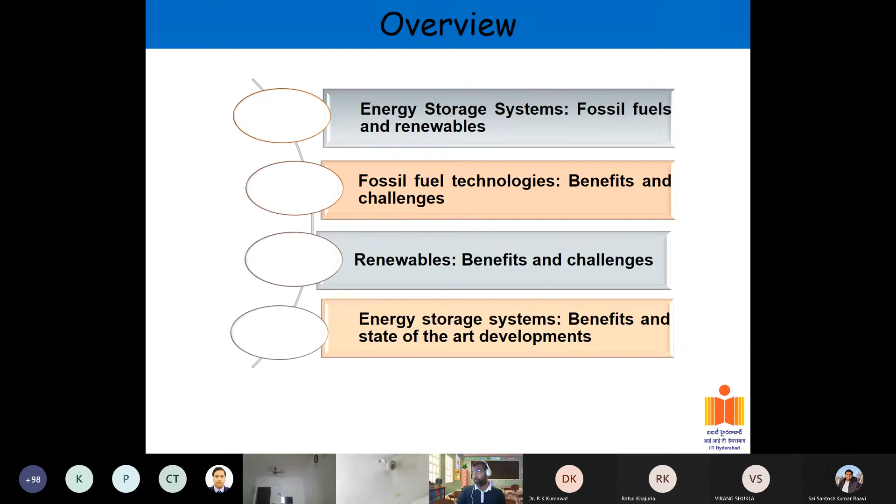And where does energy storage come in? Why does it come in? Why can't we just use solar cells and be okay with it? The idea here is to see how energy storage systems support several of these technologies, be it fossil fuel technologies or renewables. I'll get there with apt examples to show you why and how it is important.

Okay, moving on. Just a basic refresher on energy - what is energy? We keep using the term, right? Every time we talk about energy, it's just the ability to do work, and there are different units by which you measure energy: BTU, joules, whatever. So it's very basic in nature, and there are different forms of energy.

If you look at energy storage happening in nature, there are different forms it can store in: chemical energy, typically energy between the bonds of molecules; thermal energy associated with the heat of an object; potential and kinetic energy; electrical energy with the movement of electrons; radiant energy, which is energy from the sun; and nuclear energy, which you can essentially extract from atoms.

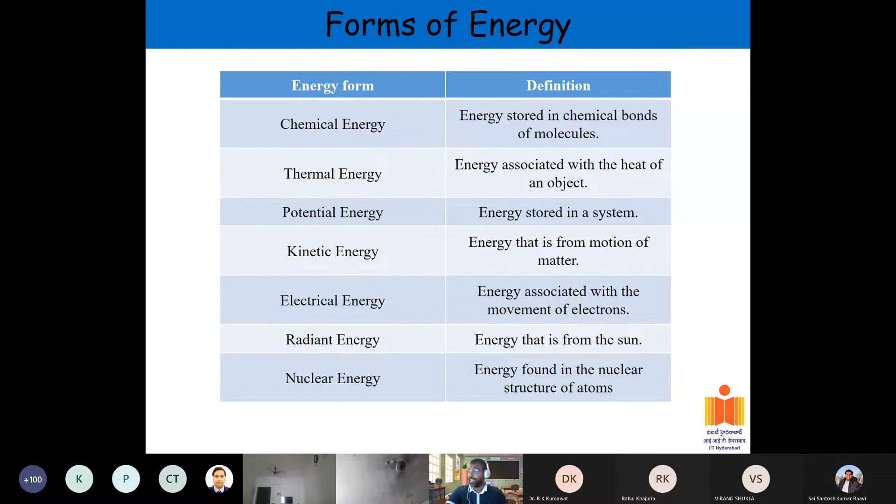Just to get you started and put things in perspective: if you look at one piece of bread with some butter on it, that typically contains about 315 kilojoules. That's the energy contained in that buttered bread.

So if you want to put it in context and think about what you can achieve with that kind of energy: you can jog for 6 minutes, bicycle for about 10 minutes, or walk briskly for 15 minutes. Sleep also requires energy since your body is still functioning, but at a much lower level, so that's 1.5 hours. If you're trying to use a car with that energy, it will only last 7 seconds.

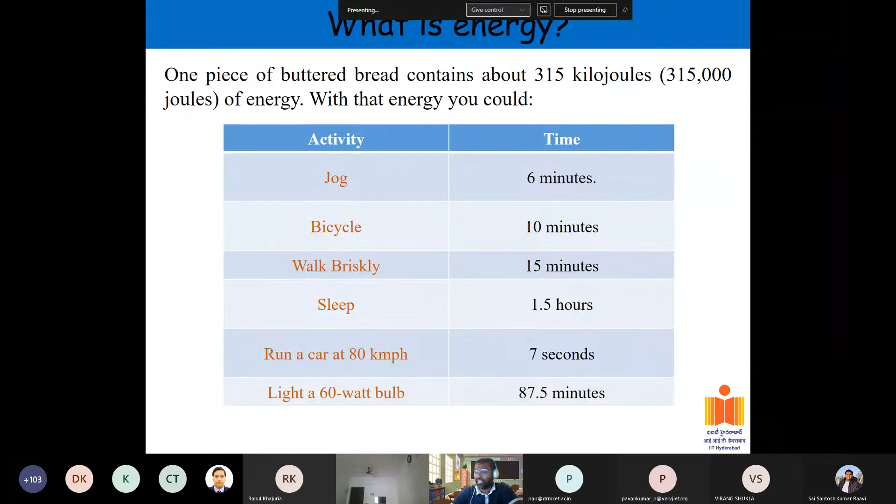Going back to what I was saying, with the same amount of energy you can only run a car at 80 kilometers per hour for about 7 seconds, and if you're using it to light a 60-watt bulb in your home, it will last about 1.5 hours, similar to what your sleep requires. This is just to put in perspective the energy required. Running a car, for example, requires a humongous amount of energy, as you can see from this example.

So we will go into energy storage systems, some of them fossil fuels. I like to refer to these generally as natural energy storage systems. If you look at different types of fossil fuels or energy storage systems available today, they include coal, natural gas, crude oil, and wood. You see a lot of times wood being burnt, right?

Then you have nuclear. The image being shown here is essentially a nuclear power plant. I'll also quickly talk about that when we get there, why it is important, or how India is playing a role in the same.

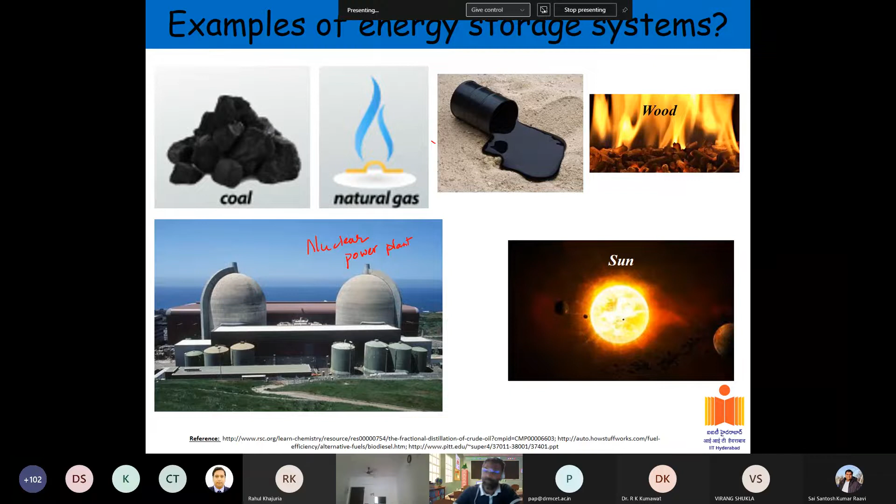And then sun, so as you all know. First, going into a typical coal plant: what happens in coal is that coal is extracted or dug up from the earth, and coal has a lot of impurities. It can be good coal, generally referred to as high efficiency coal, or low efficiency coal. One message here is that India generally has deposits of low efficiency coal, so a lot of the coal available in India is not very useful or efficient for power generation. That's the reason India imports a lot of coal from outside countries, for example Australia, and so on.

So what happens with that coal? You take the coal and essentially purify it, removing whatever impurities there are, and then you burn the coal. In this burning process, what you generate is heat, and the heat converts water into steam. Steam drives a generator, and essentially that's how you collect your energy.

The image here shows a typical setup of a coal plant. This is the location from where coal comes in, and then it is burnt here. Regular water goes in and becomes steam, and the steam leads to electricity generation. Once the steam is used for driving the turbine, it comes back and condenses into water. Whatever remains after the pulverization is essentially waste material.

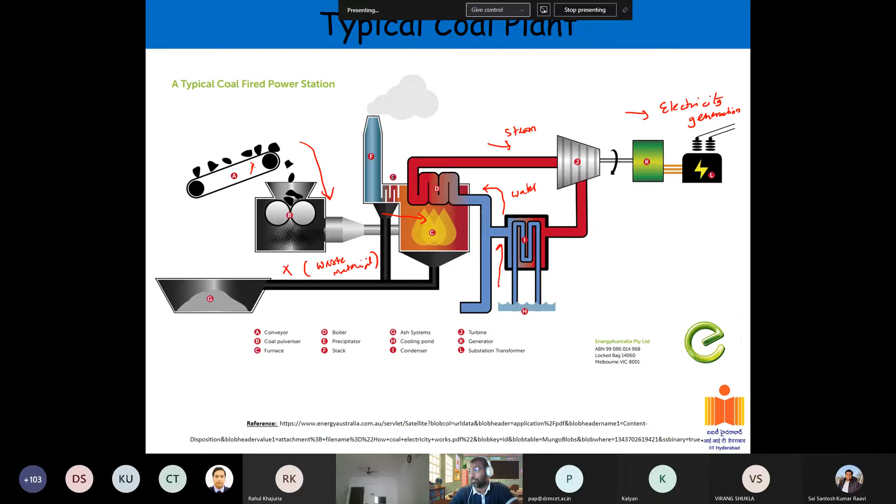So this is a typical coal process. Coal gasification and similar processes have been done for hundreds of years now, maybe a couple of centuries. People have been working on it. But we'll come back to that.

The second one is crude oil. Crude oil has a lot of uses, so I wanted to point that out in this picture. If you look at crude oil, this is a distillation column, a simple fractional distillation.

It gives a lot of different compounds. One of the first things it gives is LPG, which we use for our cooking needs. LPG is typically a mix of propane and butane, primarily.

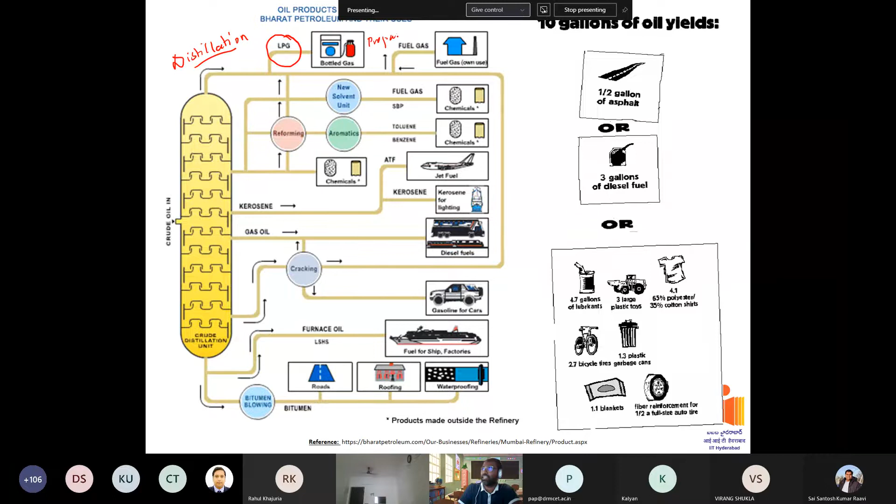Then the second part is where you get fuel gas and some other organic compounds like toluene, benzene, and so on. There's a reforming that happens in one stage. The next stage gives things like kerosene, diesel, and petrol, which you extract from there.

The next one is something called furnace oil or heavy oil. It doesn't have as much energy content as these other components, so it's used as fuel. Its energy density per weight is very low, so you don't want to use it in other applications, but in a ship it's not a big concern. Heavy oil is used in ships for various energy generation purposes.

The last portion is bitumen, which is used a lot in road making, roof making, etc. This is also very widely used. If you look at a typical crude oil extraction process, you end up seeing that it has a lot of uses.

This figure doesn't show it, but one of the main, most value-added things now for crude oil distillation is actually polymers. Polymers started off as a byproduct of crude oil distillation, and now it's one of the most value-added products, meaning it fetches the most money. Companies like Reliance and others make more money from polymers than anything else.

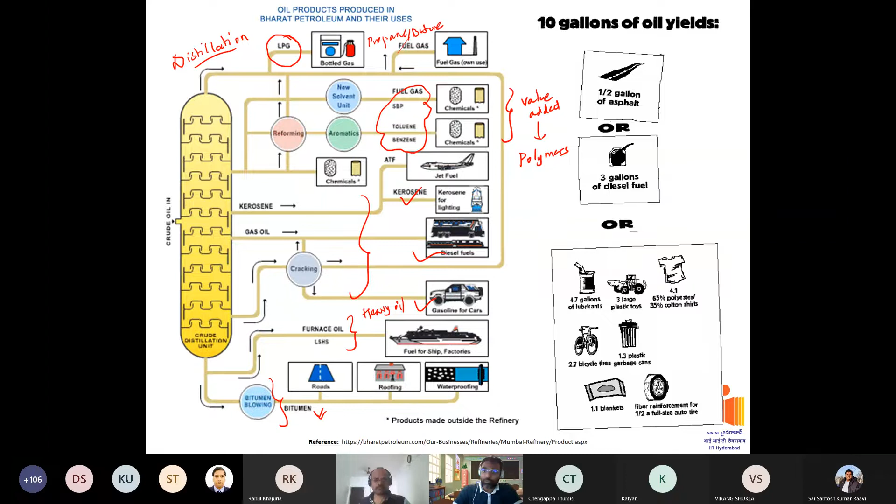All right, so that is about crude oil and some context on it. Then natural gas. This is something that has picked up in the last decade or two decades. So what is natural gas? Simply put, it is methane.

That is nothing but CH4, methane. Natural gas is so enticing because of the simple reaction by which you can produce energy from it. If you have CH4 plus oxygen, and you burn it, essentially what you end up getting is CO2 plus 2H2O.

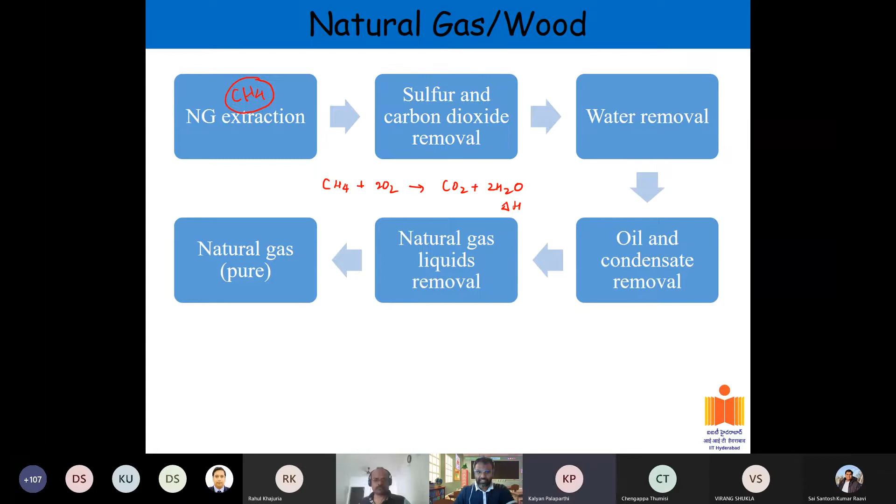Excuse me. Hello. I can... Somebody, there is a lot of disturbance, can you mute it please? Hello. Hello, can you guys hear me? Hello, can somebody please respond and say whether you are able to hear me or not? Sir, we are able to hear you, sir. You are audible. Okay, okay.

So going back, we are looking at this: a simple reaction between these two gives you a delta H, or the heat of reaction, of around minus 800 kilojoules per mole. That's a high amount of energy. What we are trying to do is extract that delta H or energy and utilize it for various purposes. That is why natural gas is also very enticing.

If you look at the natural gas extraction process, it typically has a lot of sulfur and carbon dioxide present that needs to be removed. As you drill natural gas from the earth's crust, it's not something you can directly use as is. That's one of the biggest problems. You need to refine it through several stages to get to a final pure product. So you have sulfur and carbon dioxide removal, water removal, and oil and some condensate or waste materials that need to be removed.

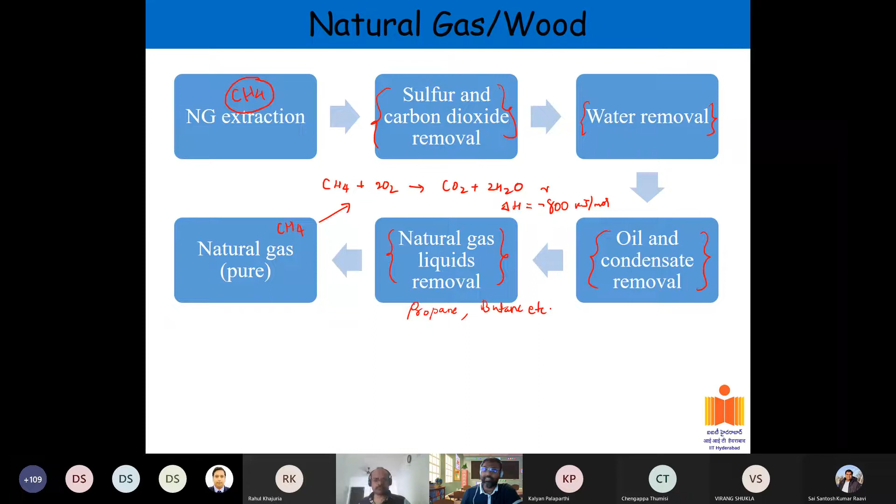So why natural gas? One of the main reasons people are looking at natural gas is because it produces less carbon dioxide than coal-based energy generation. If you compare coal-based versus natural gas-based energy generation, the CO2 production is almost half, or slightly less than half, when using natural gas. So the amount of CO2 you're generating goes down. That's one reason why all countries are now looking at natural gas based systems.

So the simple question could be: what's the big deal? Why didn't somebody pay more attention to this, say 50 years ago, and start using natural gas instead of coal at a much earlier period? The reason is one of the challenges with natural gas: methane has 80 times more heat retention than CO2. So compared to CO2, methane is 80 times more detrimental towards greenhouse gas emissions. That's one of the reasons why methane was not touched upon in the last 50-100 years.

But now there are more technologies and more efficient ways of methane extraction, where the leakages are very low, and hence the methane leakage to the environment is not as much as it was 50 or 30 years ago. People are able to contain methane in a much better manner now. What we're trying to do is use it without much leaking to the environment. There's been a lot of technology improvement in the last 20 years, and that's why more companies are moving towards natural gas based energy generation.

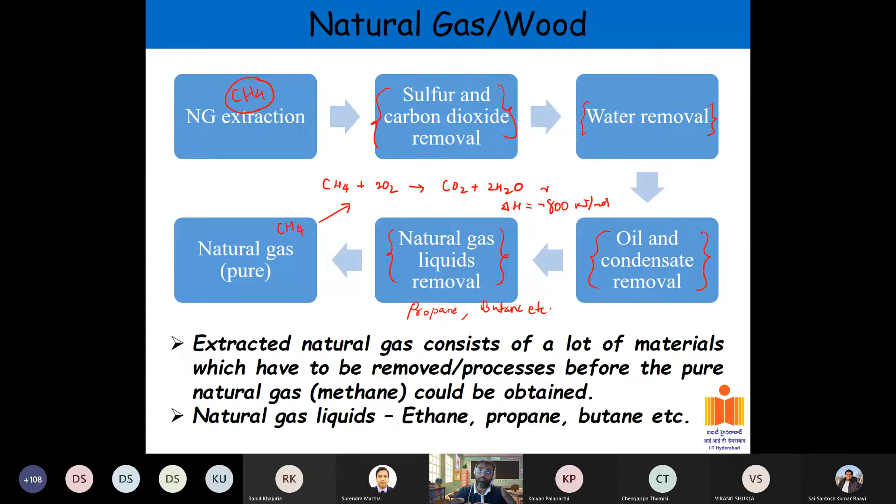Moving ahead to nuclear energy—why am I bringing this up? Because India now produces about 6,000 megawatts of power from nuclear power plants. We have about 6 power plants spread over about 3 states—I think two or three in Tamil Nadu, one in Maharashtra, one in Rajasthan or so. This has picked up in the last 5-6 years in terms of production of energy utilizing nuclear power. There's a roadmap by the government to double or triple it in the next 5-10 years.

One of the main reasons nuclear is attractive is that it's highly efficient. I'll show you in a few slides what I mean by that. Its energy density is very high—the amount of energy per kg of uranium is significantly higher than any of the other sources. I'll show you that in the next slide.

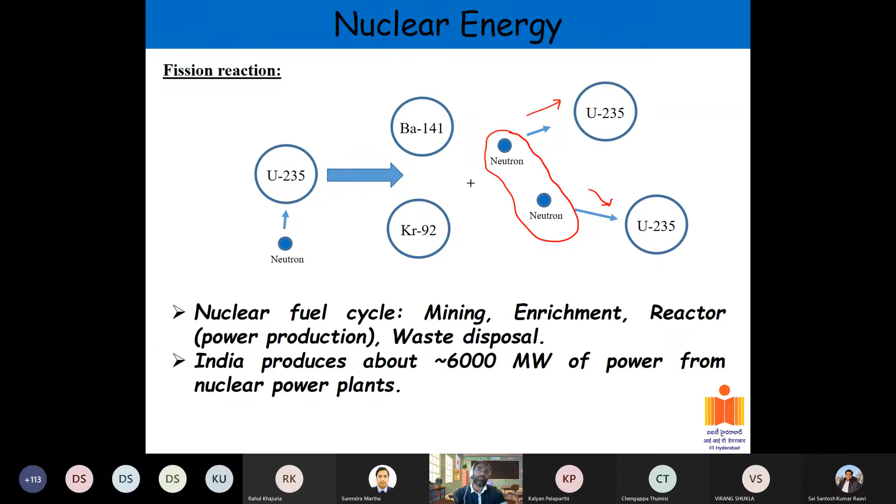But I think when there was not as much renewables, France, Japan, Russia, and some of these countries constructed a lot of nuclear plants to generate energy. Russia had one or two major accidents, but France and Japan typically haven't had any man-made accidents on the nuclear front. So yes, there is environmental concern, but it is a good source of energy if it can be harnessed well enough. If you dispose of the waste in the right manner, it can still function well. That's the whole idea.

And when you talk about energy storage systems, one of the things you refer to is primary sources of energy and secondary sources of energy. Primary sources are typically things like crude oil, coal, natural gas, nuclear, waste-based, solar, hydro, and so on. The secondary energy systems are when you convert them into usable products, something like petrol, electricity, heat, or biofuel.

What I want to convey here is that the primary sources of energy can never be utilized by themselves. The primary sources always have to be processed in some manner or the other to get to the secondary source of energy, which are the ones you primarily want to use.

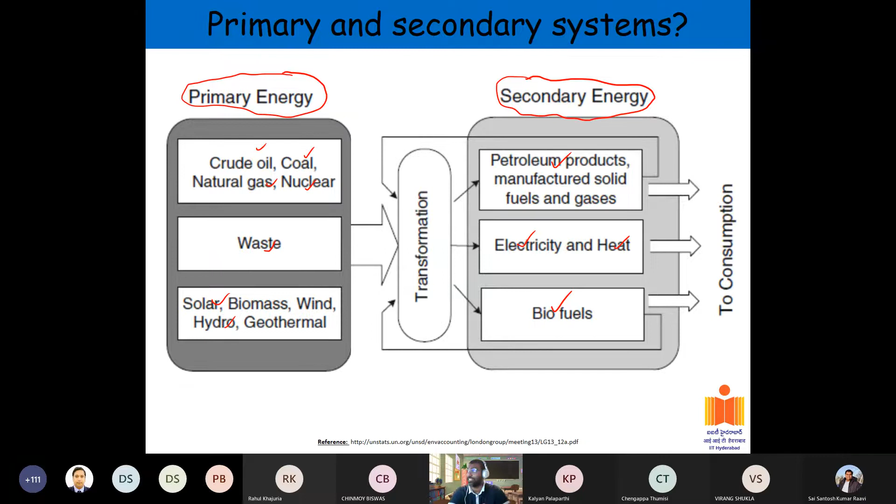So, okay, the primary and secondary sources. I think the secondary sources of energy are the ones that are directly usable by you. So there is some transformation that has to happen when you talk about primary sources of energy to go to the secondary sources like petroleum, heat, and electricity, etc.

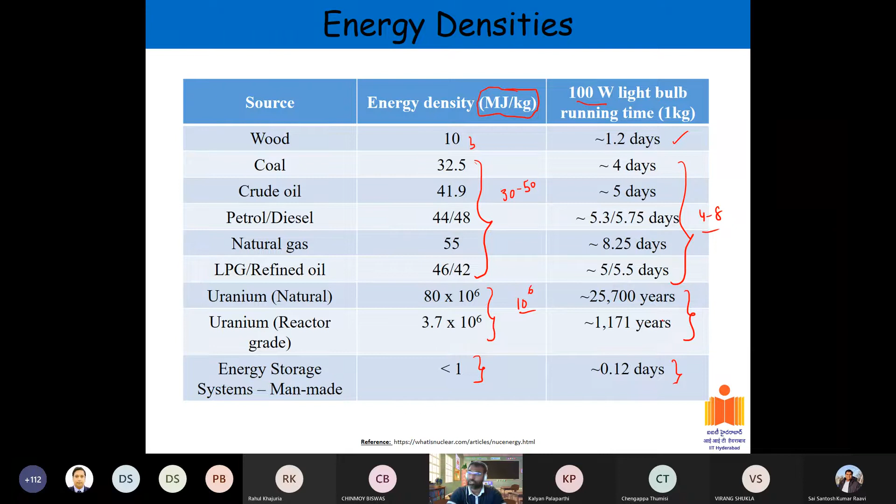So that is where we are as a world in terms of the usage of different things, and renewables still only contributes significantly lower, I think it amounts to less than 15% of contribution or usage for the production of energy, whereas coal, oil and natural gas are the primary sources.

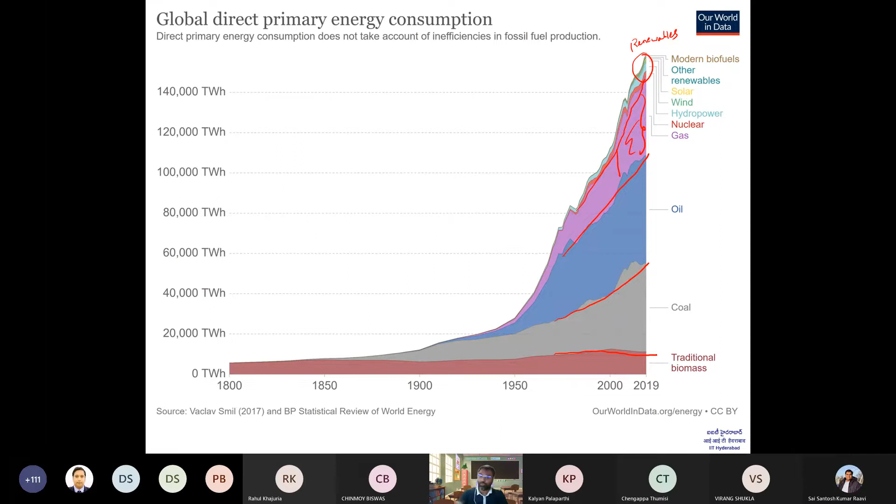So like I said, one of the main reasons for fossil fuels is it has high energy density, significantly higher energy density. And we know the technology very well, so it's very hard to move away from them. Over the last couple hundred years, we have understood very well how to extract it, how to purify it, so it's a very established technology. It's not very easy to move away from an established technology. That's one of the challenges we will have when moving away from naturally occurring fossil fuels to some of the other man-made or relevant new energy technologies.

So that's one of the obstacles that will be there. In a way, that has to be overcome if the government provides a lot of incentives. For example, if you're setting up a solar cell at your home, it might be much more expensive than getting power from the regular grid. But if there is a subsidy on that, you'll be more inclined to set it up. So maybe a 50% subsidy, and then some of the cost can be reduced. In that context, established technologies are generally cheaper because they're more established, so newer technologies are a little more expensive and we need to understand them more. Some help from the government has to come to promote these, and that is what we have seen happening in the last 10 years or so.

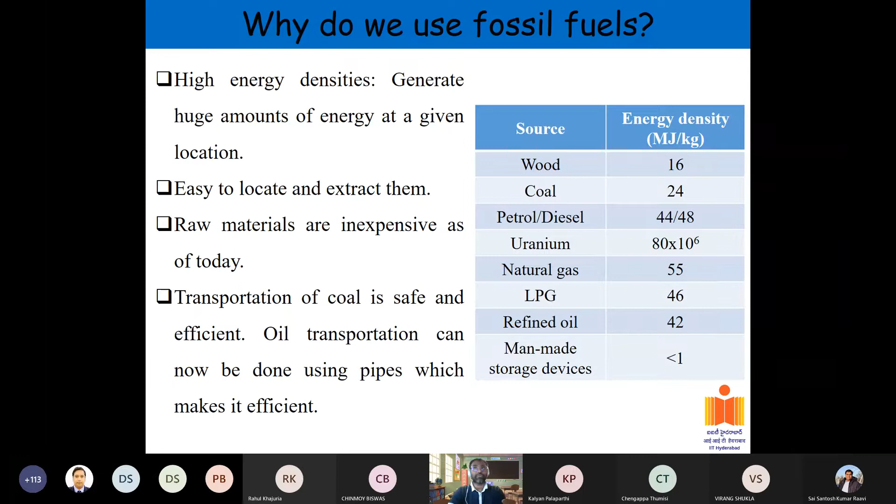One of the other interesting things about coal, oil, or any of these is they are very safe for any kind of transportation. So you move coal from Australia to India, nothing happens. You move oil from Saudi Arabia to India, it comes in ships, and it's rather very safe. So the primary sources of energy themselves are very safe for transportation and movement, whereas some of the man-made energy storage systems like batteries, we have seen cases of safety issues. That is another challenge we need to address to make something more widely used.

Okay, so until now I've been articulating why fossil fuels are so interesting, or why they hold the major share in the world, and it all looks like my explanation shows they are very good. No, they are not. There are big challenges with them, so that is what I'm going to discuss in this part. One, people believe they will exist somewhere between 100 to 300 years.

I think whatever reserves we have found till now in the Earth's crust will typically last for 100 to 300 years, whether it's crude oil, natural gas, or coal. So the question is, what happens after 300 years? Maybe we'll find new reserves, but we don't know. So what shall we do if coal, natural gas, or crude oil no longer exist in 300 years? That's one of the reasons why we want to go to alternative energy technologies.

The second reason is global warming, which you see happening over the last 200-300 years. I think it has been happening for a couple hundred years, but it's more predominant in the last 50 years because of the growth of technology. There's been a significant increase in technology, right from the 1990s or 2000s to 2020, a 20-30 year span where the phone market, TV market, laptops and computers have all evolved. This significant growth in technology leads to high energy consumption, and when that energy consumption comes from fossil fuels, there's a predominant effect on the Earth's temperature.

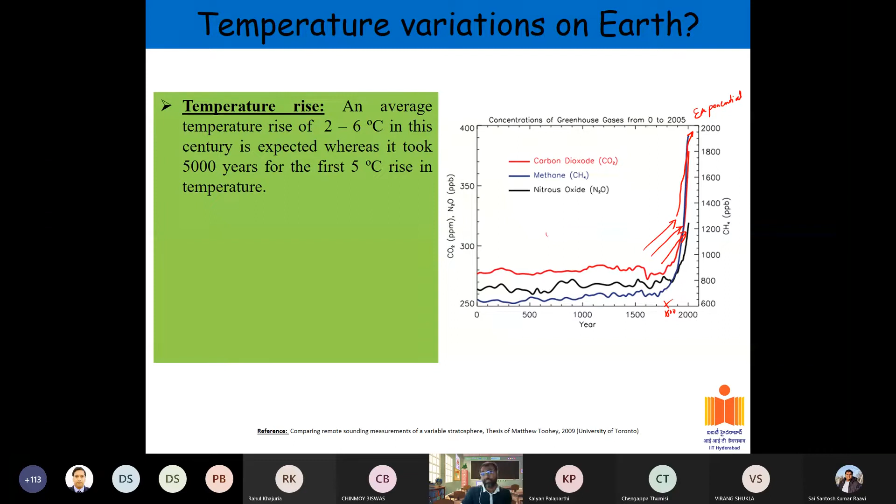You might ask, what does 1 degree centigrade change actually do? If you look at your body, for example, as a simple analogy, 98 going to 100 means you have a fever - a stark difference in how your body functions. It's the same anywhere else. A one degree temperature rise will typically lead to a lot of polar caps melting and things of that nature, having a profound effect on life on Earth.

The main causes are CO2 and CH4, particularly CH4. As I mentioned when we talked about natural gas, CH4 stores 80 times more heat than CO2, so that's a bigger problem in global warming. But if you can efficiently use natural gas without any leaks, you can curtail or overcome that problem essentially.

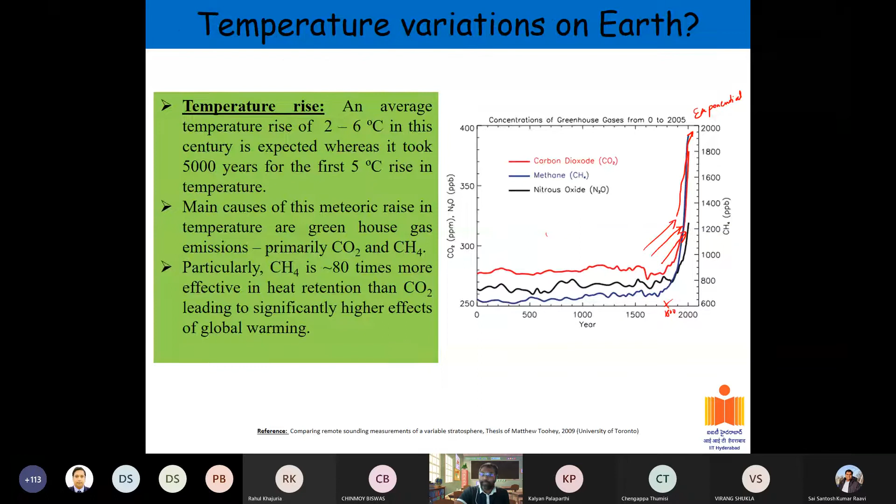I showed you this coal-fired power plant before - everything looked very nice and good. So why do we have to move away from coal? The overall efficiency is the issue - there are a lot of mechanical parts involved in electricity generation using coal. Because of that, the efficiencies of the best new technologies today are only slightly over 50%, around 50-55%, but they are more expensive. The general efficiencies of these coal plants are only 40%.

Most of them have to undergo some processing, and when they undergo the processing, the efficiencies go down. So essentially what you are extracting will be comparatively much less than what you can extract. So that's one of the challenges - the efficiency of these is low.

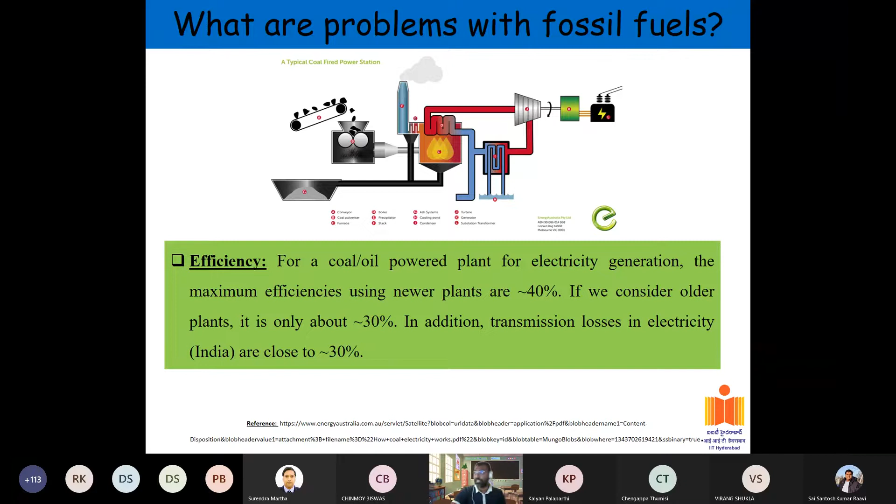What happens is your energy consumption drastically varies when you look at a single day. From 12 o'clock in the morning to 12 in the night, from 12 to 6 you might not have much energy consumption - everybody is sleeping, or most people are sleeping. But then you look at people going to offices, going to schools, going to shops, whatever. So there is a sharp rise in the energy requirement from, let's say, 6 to 8. In a 2 hour gap, you have a sharp rise in the energy requirement, and then it more or less stays there for the next 4 to 6 hours of the day.

So that energy, and then there is a small peak in the evening. Typically when people come back home, they switch on the TVs, and do whatever work is at home. So there is a slight increase in the energy requirement, and then it goes back down by nighttime.

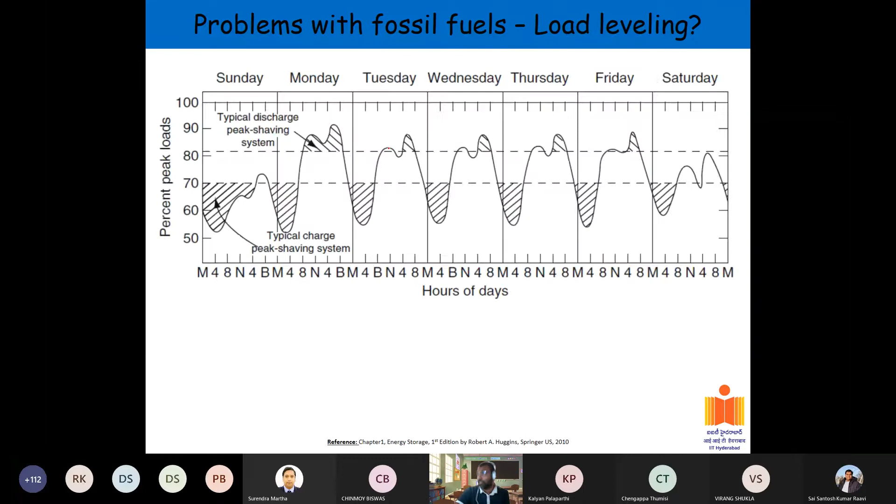But what can energy storage systems do? A lot of the power plants, and not only the power plants but the subdivisions where power distribution happens, have these energy storage systems. So what does that do? When you generate it at a much lower level, say 20,000 megawatts, and you're not using it, you can charge your energy storage system. You are charging it during the night time until early morning, using that extra energy that is there.

And during the daytime, you don't have to rely on your power generation plant, but rather you can use your energy storage system to discharge. What it is doing is discharging, essentially giving you the required energy. So now you can see how the problem of high generation has been brought down when you have an energy storage system along with your power generation source.

So there are different technologies now being used at the substation level to supplement the extra needs of energy this way. That is where energy storage systems play a significant role, even for fossil fuels. Without storage, energy generation and distribution is very inefficient. The take-home message is that energy storage has to go hand in hand with any energy generation source for it to be highly efficient, or else you can still do it, but in a much more inefficient way.

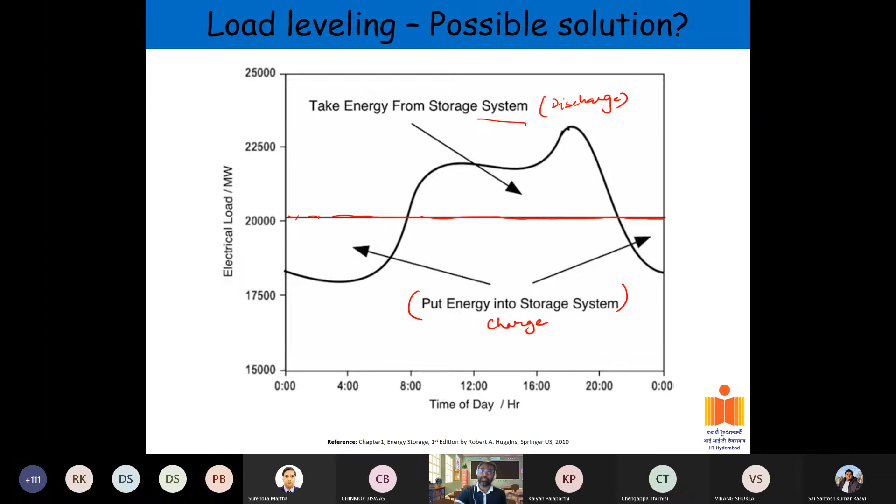So essentially, if you connect your energy generation source with a battery, your voltage comes through the battery, which absorbs all these modulations or undulations, and what you get out is much lower fluctuation in voltage. That's why, if you've looked at your own house inverters, typically all the current runs through your inverter battery. The reason being it can accommodate all the voltage fluctuations, and what you get into the house is something that's less fluctuating.

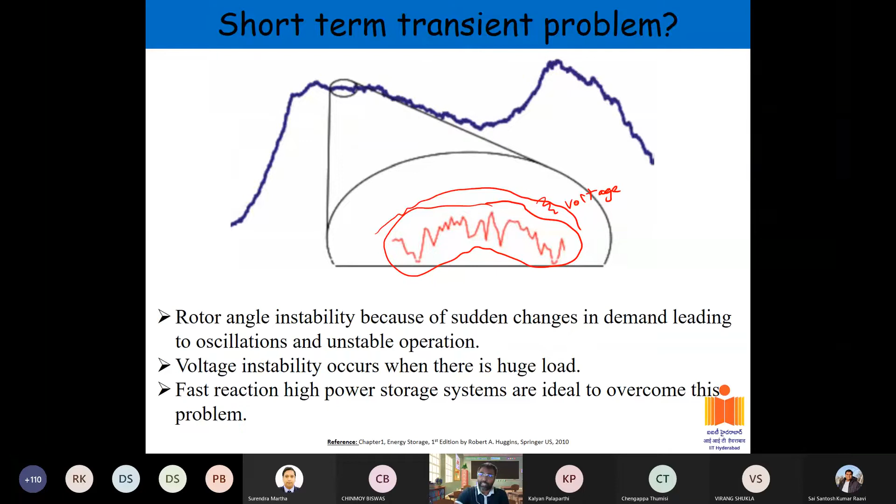That will keep your electrical appliances running for a much longer period of time, or make their life longer. Otherwise, if you see a lot of voltage fluctuations, the appliances might get burnt and all these problems come in. So those are a couple of things that are very interesting where energy storage systems quite help. They're used now, and I think they'll be used as long as the energy sources exist.

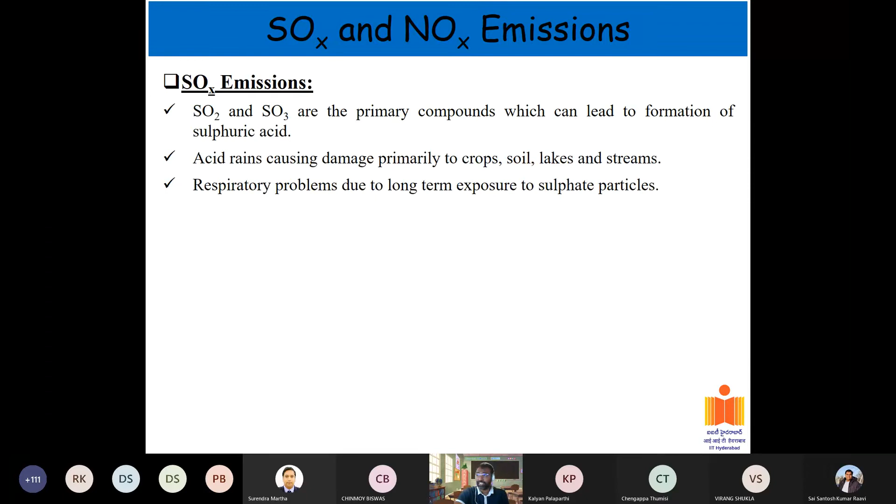And the other problem, I think Professor Pillai was referring to, is environmental problems, or the air not being clean enough in India. Where does that come from? It is primarily because of SOx and NOx emissions, the sulfur oxides and nitrous oxide emissions. Where do they come from? Sulfur oxide comes from fuel that contains sulfur. For example, petrol is relatively much more pure, so it doesn't contain any sulfur, whereas diesel-based operations have some amount of sulfur in diesel. So what does it lead to? It leads to sulfur emissions, sulfur oxide emissions.

And nitrous oxide emissions. So when you are utilizing petrol or diesel, typically you have to heat it to 900 degrees centigrade. If you look at your car, the temperature at which the combustion happens is about 900 degrees centigrade, and air is used as the gas for combustion. So in air you also see nitrogen, and at that temperature it's very hard to prevent formation of nitrous oxides, or NOx kind of substances.

There's something called a catalytic converter which prevents this from happening, or at least reduces the amount of nitrous oxides formed. But not every car has a platinum converter - those catalytic converters are expensive, and you only see them in higher end cars. So the problem of nitrous oxide emissions and sulfur oxide emissions is still there in India.

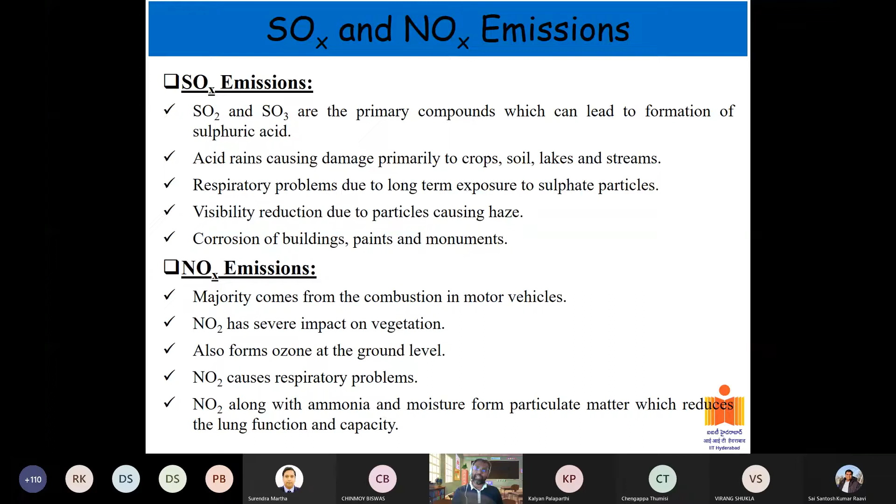So what does it do? These emissions essentially start forming small particles in the air. They react with various things in the air and start to form small particles, which you call particulate matter. And why is it so concerning, the particulate matter?

Just to give you an idea, your hair size typically is about 50 to 70 microns in diameter. Fine sand on the beach is about 90 microns in diameter, and so on. Whereas the particles I am talking about, the particulate matter particles, are less than 2.5 microns.

So what is the problem? Your simple question might be, why are we concerned about it? It can still exist, but what is the concern? The problem is this particulate matter can go inside your lungs, but it cannot be pushed out. The reason is that your lung does not have enough pressure to push it out. So when you inhale it, these particles go into your lung, sit there, and stay forever. When you exhale air, the lung does not have that kind of pushing power, or pressure - it cannot push these small particles out, because they're so light they settle in your lungs.

So what does that do? That reduces your breathing capacity with time. If you're continuously exposed to it day in, day out, over a period of time you lose your lung capacity, and that is a realistic problem that needs to be addressed. That's one of the main reasons why there are so many new policies in the last 10 years trying to reduce these particulate matter emissions.

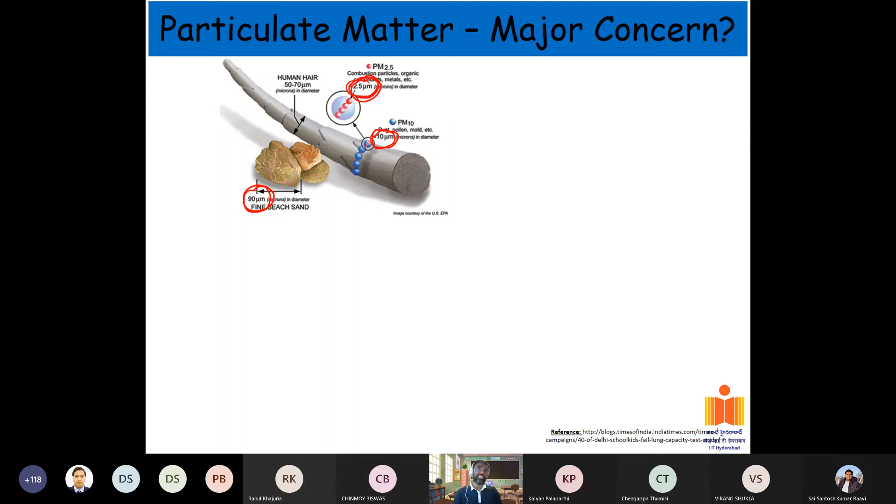The reason being, when you start burning any plant-based waste, you generate particulate matter again. So that's the problem - if you are burning it, it slowly generates particulate matter, and that particulate matter has big concerns, like I said.

So this is a study done 4 or 5 years ago, I think from 2016 or so - I haven't seen any other study after that like this. What they have done is tested children's lung capacity, children below 15 years of age, in the age group 10 to 15 years. What they have seen is that several children, up to 40%, lose their lung capacity in big cities like Delhi, Mumbai, Bangalore, and Kolkata, primarily because of particulate matter. That is something very significant, very not good for society.

This is a major challenge why we want to move away from fuels like petrol and diesel, both in an industrial setting and a vehicular setting. If you want to stop particulate matter, we need to act. That's why the new vehicle disposal policy gives you some money to dispose of your old vehicle. Why? Because a 20 or 30-year-old vehicle will emit a lot more particulate matter than something only 2-3 years old. So the government is now trying to force these old vehicles off the road to prevent particulate matter pollution. I think it is imperative for us to follow these steps to get it down.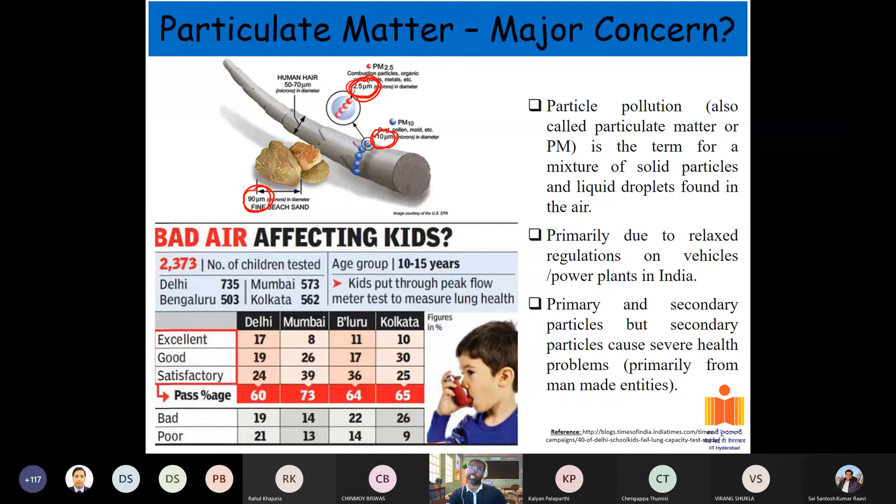Apart from this, these points are very general and will apply to a lot of countries, or the entire world. This slide will present what is very particular or peculiar to India.

Our rural areas are quite segregated in comparison to many places. The connectivity between rural and urban areas is still a challenge. How do we have power lines to such remote areas? So the idea is, instead of fossil fuel, why don't we set up a solar energy generation plant in a small village that is off grid? You can set up a plant there that takes care of all the needs of that village, even if it's only 100 families. In that context, any renewable energy generation and storage will be very efficient, one reason being connectivity.

If you look at urbanization, take Hyderabad for example, where I'm from. In the last 10 years there's been a drastic change in the number of people coming here and wanting to stay. So there's rapid urbanization, growth of apartments, growth of commercial buildings. Where do you get the energy from? It's not simple to raise the output of coal-based generation systems — you have to build a plant to improve that output, and that takes years.

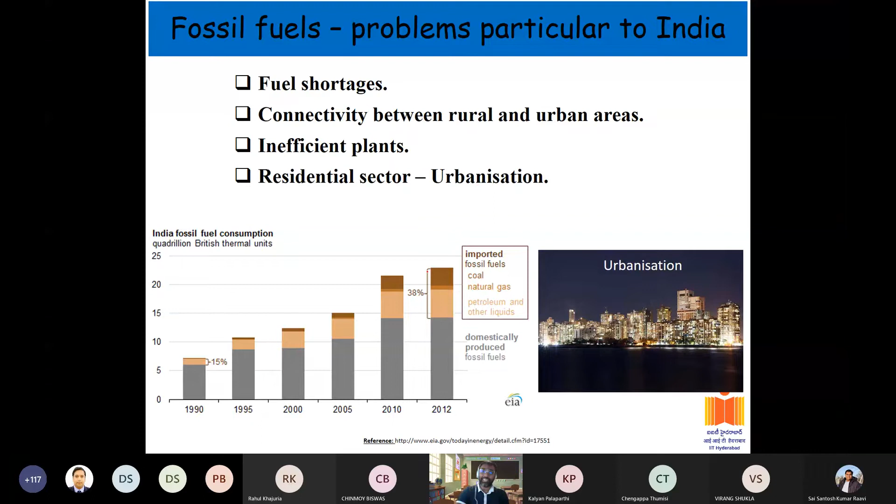So several of the coal deposits cannot be utilized in power generation, and we have to buy it from elsewhere. Primarily now Australia is one of the sources, or supplies us a lot of coal. So what happens is you are also dependent on another country for your energy generation needs. That's not a very suitable scenario. What if tomorrow they stop giving you coal? I mean, it won't happen, but I'm just talking about a hypothetical case where these things might happen, so you need to be prepared. That's one of the reasons renewable energy sources are important, because that will reduce our dependability on any other country or source. Essentially, we as a country can be self-sustainable when we go to renewable energy sources.

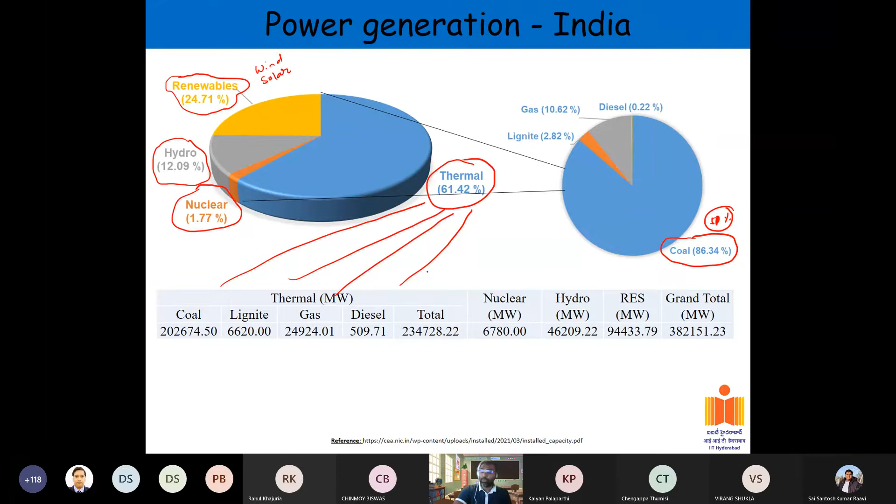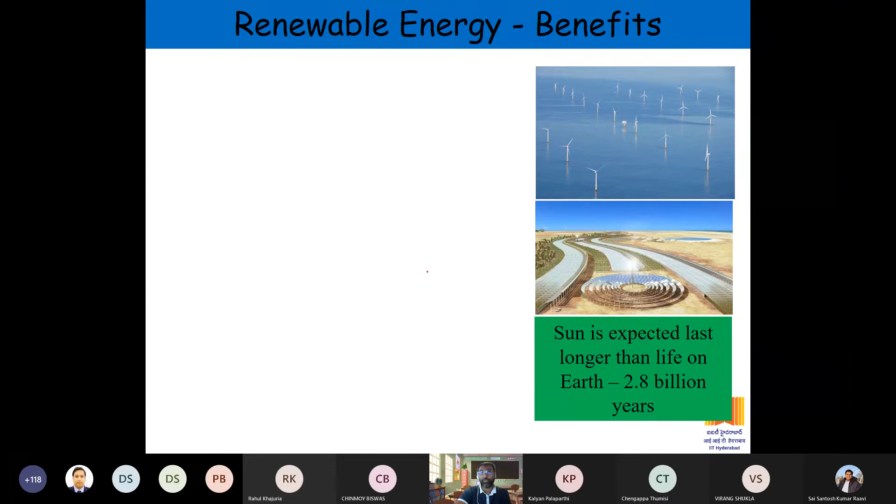Okay, so I think enough said about fossil fuels. I hope I've given you enough reasons why we should be looking at renewables and energy storage systems. This is a prelude on why fossil fuels are good, have been good so far, and still are probably good in terms of efficiency and energy density. But what are the challenges that have started cropping up in the last 20 years, and what are the more significant challenges that might come in the next 20-30 years? I hope that whole overview gave you a good understanding of those concepts. So now we'll move to renewable energy.

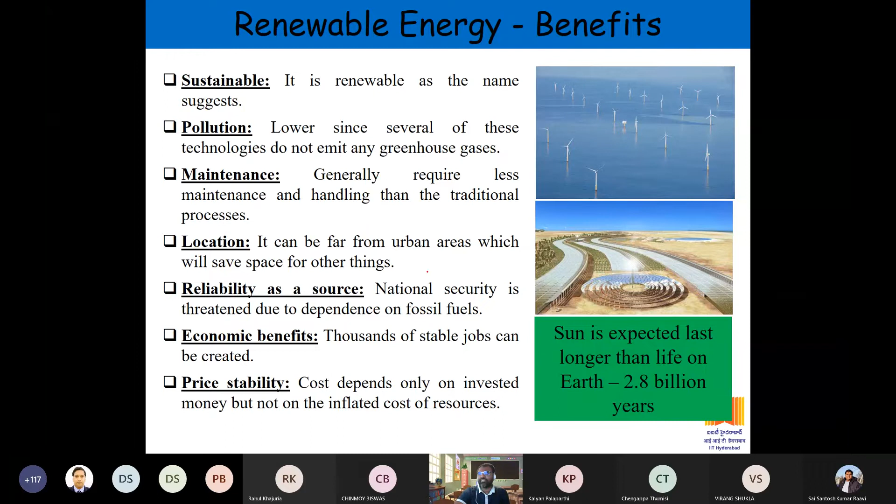So one of the main things whenever we talk about green, whenever we talk about producing our own things, sustainability is very important in everything that we do, in my opinion. It has to be sustainable - if you're doing something, it has to be there for the next 100 years or 200 years or 300 years. You cannot do something just for a day and say we've accomplished something. No, something has to be sustainable for it to be efficient day in, day out. Other benefits are well known: low pollution, low maintenance, and good economic benefits, which we have discussed enough.

Then what is the challenge? Why haven't we moved to renewable energy sources like 30 years ago? Why haven't people moved to it? Even today, I think we find it quite challenging. In terms of renewable energy systems and being able to implement them, you still think it's challenging. Why? One of the points repeatedly mentioned by Professor Pillai is reliability of supply - wind and sunshine are highly intermittent, so the weather dictates the supply. That is one challenge we encounter, especially in India. India is much better in terms of sun availability, but a lot of the northern hemisphere countries are not so. I'll show you in the next slides what I mean by that.

And the efficiencies are low. I talked about this, because we are still in the research stages, still understanding these systems. Our effort into these systems has only started in the last 2 decades or 20 years. We have achieved a lot in the last 20-25 years in this renewable energy domain.

But I think there's a long way to go to understand them further. And this high capital cost is very expensive, especially initially, so it has to be subsidized by the government, or some form of help has to be there for people. This is all more to do with economics. When something is available for 1 rupee, why would you buy something for 5 rupees, right? So that's a good question.

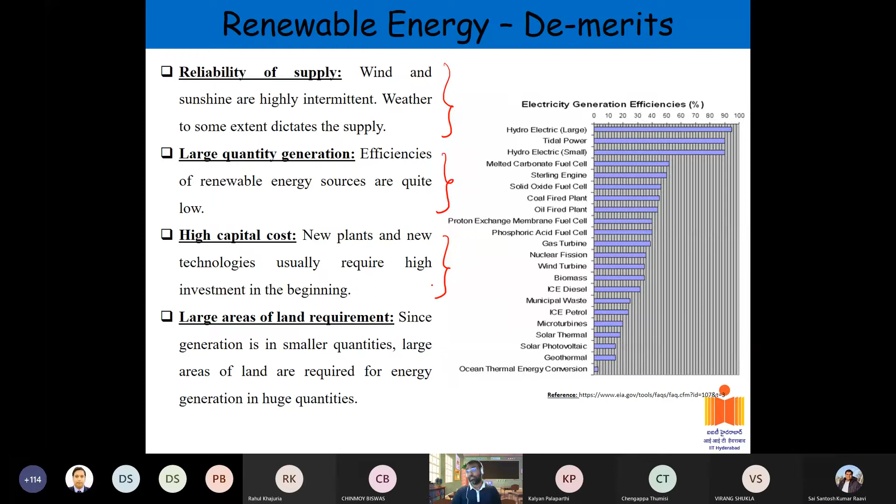For example, solar cells, when it started in Germany in the early 2000s, their kilowatt hour cost was something close to 10 euros. And by 2010, it dropped to less than 1 euro per kilowatt hour of generation. As you increase the scale, this is what you call the economics of scale - the cost goes down naturally. But that increase in scale has to happen with some kind of support in the beginning. That's where it is very important for countries to support it.

So solar energy, I won't do much more. I think we have a whole lot here. So the only thing I wanted to show here.

For example, if you look at 3 different places - London is the blue one, Cairo is the red one, and Kampala in Africa is the green one. If you look at the solar radiation in a year, from 1st January to 31st December, you can see that the variation is not much when you're talking about Kampala, so it's fine, you're not much worried. But as you go to Cairo to London, you see that there's a huge variation in how much sun, the incident sunlight, happens in those places. So that's where the challenge comes in.

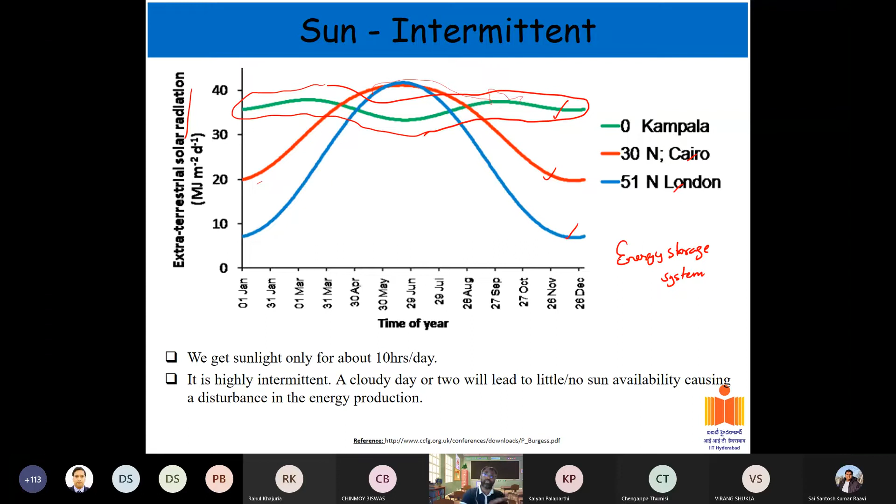So this is where it is not as straightforward to use solar energy at any location. What is the best way to go about this? Again, use an energy storage system. In the night time, or in the daytime when you have a lot of sun, you charge your energy storage system. Nighttime you can use it, or when you have sun you charge it. When you don't have the sun, you use it.

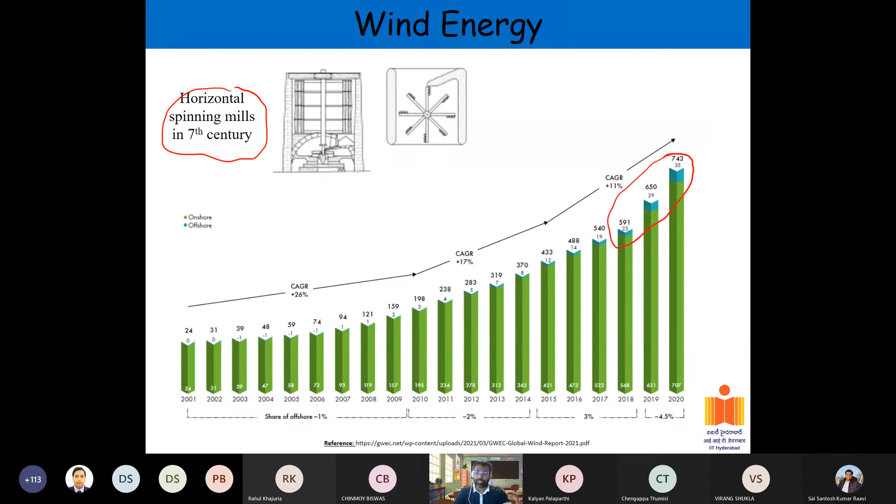And this has been existing for a long time. We have had these kinds of mills from the 7th century, so people knew this concept. Only now are we implementing the technology at a much larger scale. But again, it's the same problem with wind just like you saw with sun.

So what do you need? Again, you need an energy storage system. This is where energy storage systems are very important for any energy generation source. You can have a very highly efficient solar cell, highly efficient windmill, but without an energy storage source, at night times you cannot use solar energy, and when there is no wind, you cannot use wind energy. So a storage system has to be there - there's no separation of these two. Whenever you talk about energy generation sources, you need to think of it as there being a storage system with it. Without a storage system, the efficiencies are very, very low.

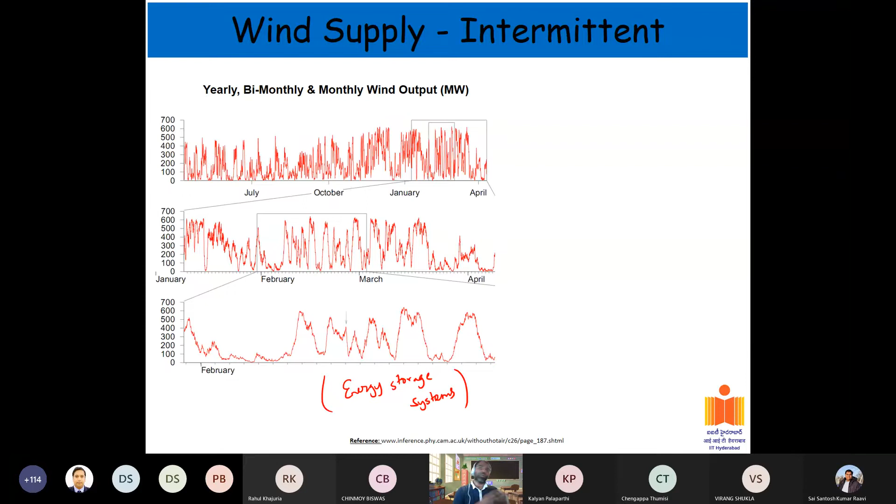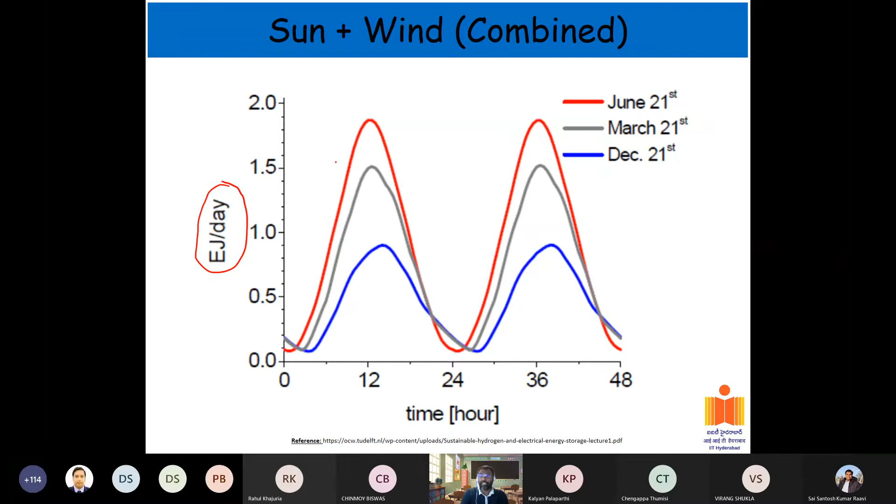The answer is I have an energy storage system. That's as simple as that. Okay, so that is about wind and solar.

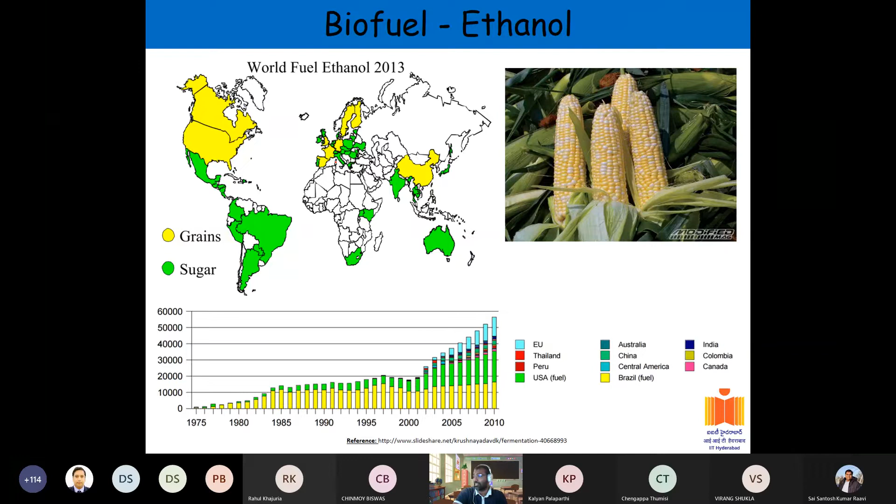Biofuel is another interesting thing. I think this program is not going to cover a lot about biofuels, but I just wanted to touch upon the topic in case somebody is interested in that area. So biofuel, primarily, one of the main reasons why it's very interesting is ethanol based.

I don't know if anybody has looked at the news in the last week or 10 days - the government is now trying to put about 20% ethanol in your petrol as an additive. It was about 10% until very recently. Now we are trying to move our engines - there is testing happening to see if the regular petrol engine can sustain 20% ethanol, and if not, what has to be done to achieve that blend. So it's a blend of 80% petrol and 20% ethanol, compared to around 90-10 now. The government is pushing for 80-20. So why ethanol?

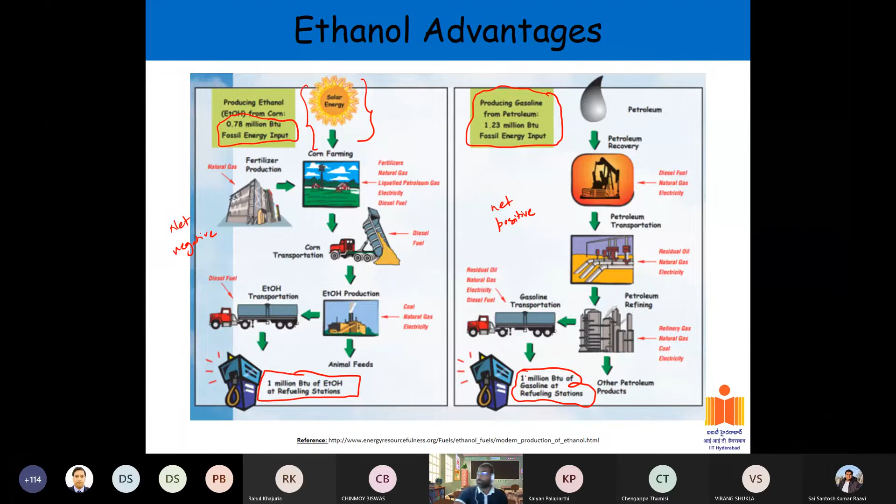The second good thing with ethanol is the carbon cycle. We've talked about carbon dioxide generation and carbon cycles in a bigger context. If you look at fossil fuels, it's a very long-term unbalanced cycle - you're burning fuel now, generating CO2 now, but that same CO2 has to be captured and put inside the earth, which will take 1 million years to regenerate to fuel. So the carbon dioxide produced today will only be regenerated after roughly 1 million years - that's a long-term unbalanced cycle.

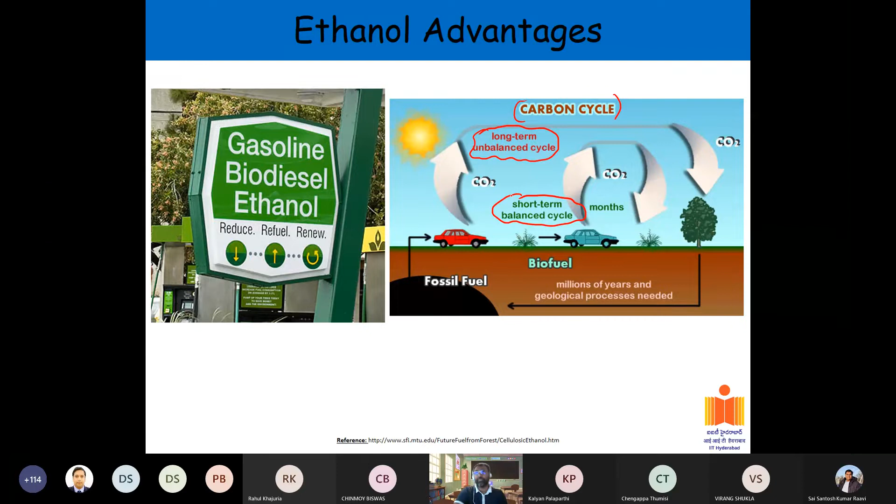So essentially what you call a much balanced cycle and short-term cycle. That carbon dioxide you're producing in your car using ethanol will be utilized by the plants that are producing ethanol. So that's one of the main advantages of ethanol. If we can make it a reality, it is truly very interesting, and it is one of the technologies that will increase the net positivity of energy as well as reduce the carbon dioxide.

But then this is a big question, a very debatable one: food or fuel. It's very hard to say. If there's not enough food for people to eat in countries like Africa, and you say you want to produce fuel, what is important? This is a big question that has been there for a long time. When you talk about ethanol, we need to find a way around it. In the sense, we need to be able to feed everybody and then go this route. But if not, then this is always a question that will be there.

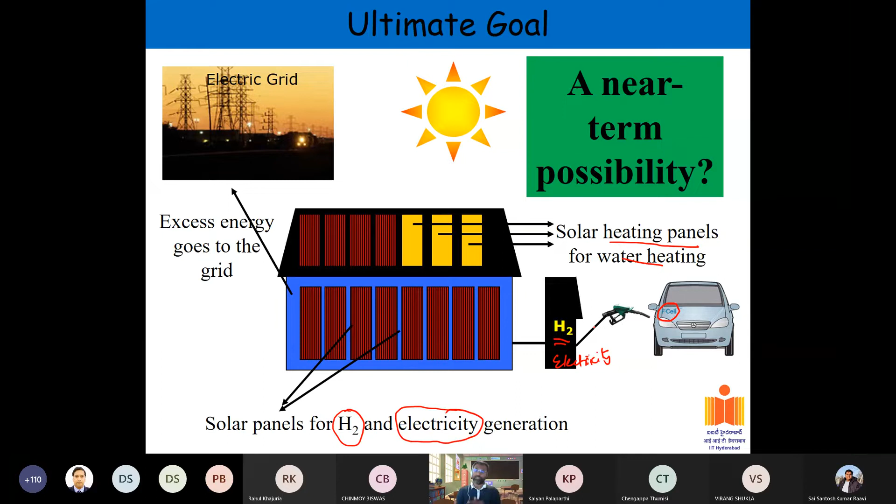So imagine you are giving back to the grid. You have excess energy production at home, so you are giving some of it back to the grid. You can use the solar heating panels for water heating and other purposes also. And then you can use hydrogen or electricity depending on what kind of car you have. I put hydrogen here for a fuel cell car, but if you have electricity directly that works too. So what does this show? The picture is trying to show self-sustainability. Essentially you don't depend on anything for your power needs, but rather when there is excess energy, you are able to donate it to the grid and take care of all your energy needs. This is what we are aiming for as a world, towards self-sustainability of individual people or individual houses.

Okay, so what is energy storage? Energy storage is a good balance between supply and demand, that's as simple as that. In the simplest terms, I look at it as the balance between supply and demand. When there is high supply, low demand, you store it in an energy storage system. And when there is high demand, low supply, you extract energy from the energy storage system. So in a very simplistic sense, it's just a balance between supply and demand.

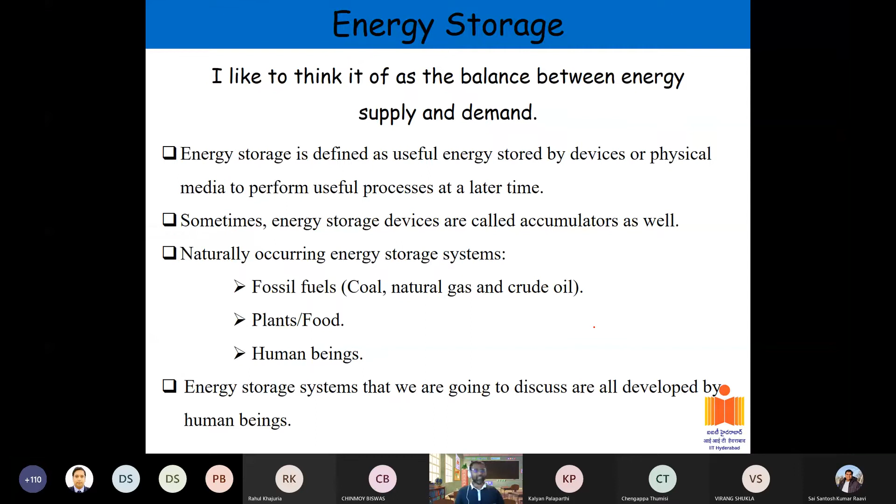So I think we discussed about several of these. I think this slide is okay. So there are different types of energy storage systems that are available.

Mechanical energy storage systems include pumped storage, flywheel technology, compressed air technology. If you go to electrical, there is capacitors, thermal, molten salts, chillers, chemical, hydrogen usage, methane, natural gas we talked about, and electrochemical - this conventional batteries, various types of batteries, let's say.

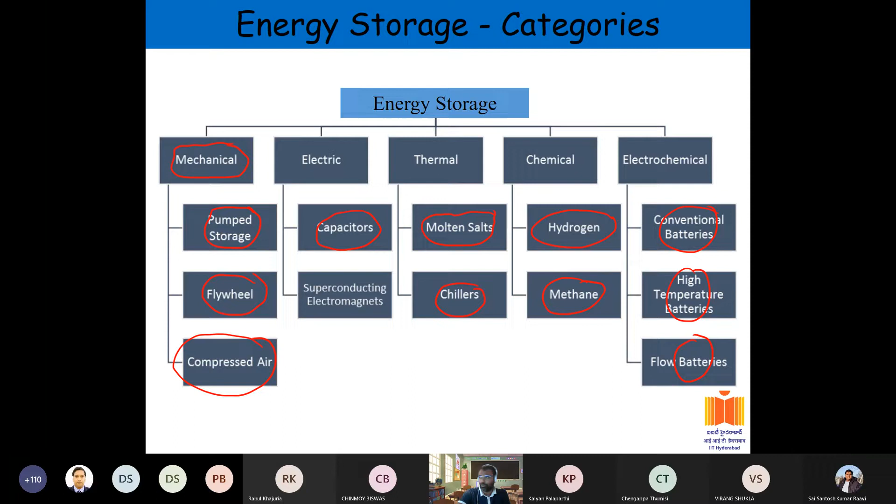So I'm going to go into a little bit of detail into some of these topics. I think just give you a very basic idea about what they mean, so that if you are interested, you can get started in those areas.

So the first one is compressed air energy storage. So what happens in this compressed air is that you take air - at the bottom you have a cavern, typically a big hole in the earth that is surrounded by different rocks. So what you do, you compress the air and put it inside.

When you have excess energy, for example here they are showing that you have a PV farm, you have sunlight, you have excess energy. What you are doing, you are taking the energy from them, compressing your air and storing it here. And then there is a demand when the sunlight goes down.

When there is a demand, what you can do, you can take the air up and use that air to kind of generate electricity. So you can use that compressed air to heat water, and the water generates steam. Steam can be utilized to generate electricity. So this is what you call compressed air energy storage.

So this is a low cost energy because you are not utilizing as much - mechanical storage happens in the earth. As long as you can find a big area where you can store a lot of this compressed air, there's no challenge with it. So it is almost inexpensive, and then you are extracting it when it is needed.

Air is the medium here, and it's environmentally friendly, so you don't have to worry about it. You use air, compress it, put it inside, take it out, decompress it, extract energy, and then again it is let out. So you're not polluting air or doing anything there. So in one way, it is one of the most environmentally friendly techniques that you can think of.

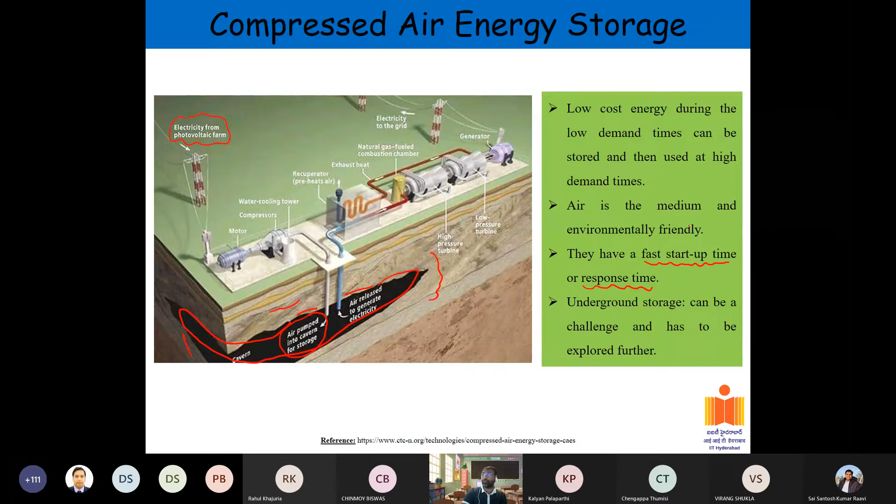And I told you about fast response times. That is very important when we are talking about energy storage systems, because some responses have to be very fast, instantaneous, some can take time. So for example, compressed air energy storage system is a fast response system. As soon as you release air and produce energy, you can give it out.

So that's one of the challenges - underground storage is a big challenge. So you have to find the right space, essentially the right location to store all this.

So I think usually what I think now, it has not been explored as much as in the last 5 years. I think in the last 5 years people have explored compressed air also quite a bit, and now I think countries like US have several places where they do this compressed air energy storage.

It's a very interesting system. It's a very straightforward system, only that you have to have the right location. So the location - typically what they do, wherever they dig the coal from or extract anything from the earth, they are using those locations to kind of put compressed air in it.

But one of the things that needs to be understood is the geological pattern. So you need to understand the geology of that location to be able to say whether we can utilize it or not. That's something very important to understand. You cannot go to any location and put air in. And if something were to happen, then it's a huge problem. So it has to have a very methodical approach to be able to implement it on a large scale.

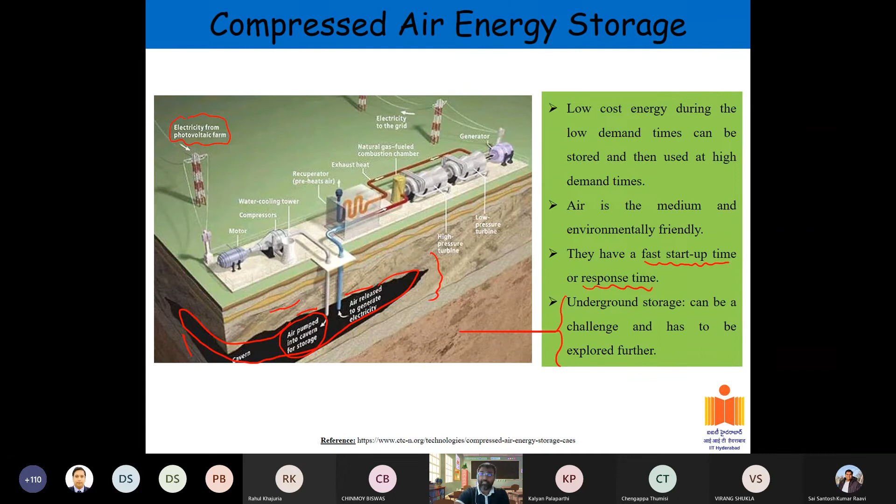Okay, so that is about compressed air, and that is a very interesting research topic. I think if any of you is interested to take it up, I think that's not being explored as much as required in the present scenario, at least in India. So that's something people can look at.

So the second one is flywheel energy storage. One of the mechanical energy storages is flywheel energy storage. So what you have is a rotating mass here.

So essentially you use excess electricity to convert it into kinetic energy, and then extract energy back. First you convert the electrical energy into kinetic energy, and then whenever energy is required, you convert the kinetic energy back into electrical energy. That's what, in simple terms, you're doing in a flywheel energy storage.

So kinetic energy is stored. There is a built-in rotor that acts both ways, converting electrical to mechanical or kinetic energy, and then back from mechanical to electrical. Again, it has a very fast startup time or response time, which is very interesting. So if you have a flywheel, you can instantaneously generate energy if you want.

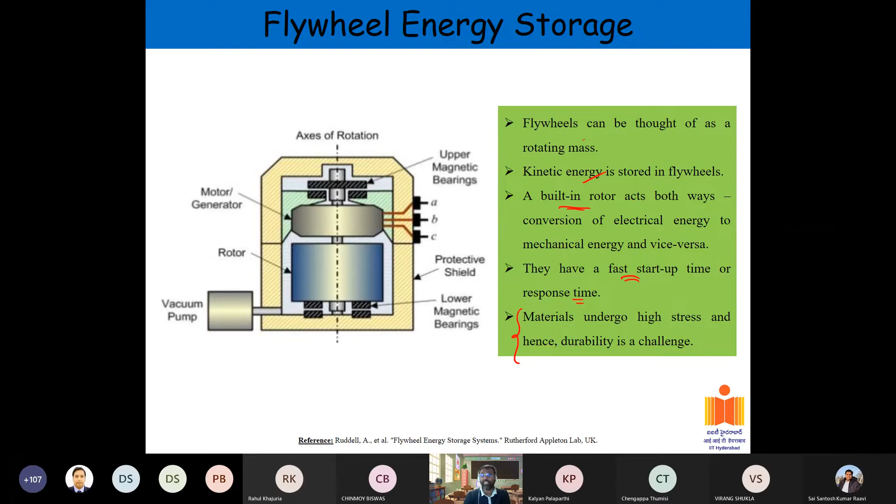The main challenge here is because everything is rotating all the time, continuously, sometimes at very high speeds, the materials are a big challenge. So what material to use? Because there will be a lot of stress on the materials since it is continuously rotating, the materials can be damaged over a period of time. If you're running it continuously, material degeneration can happen, and when that happens, the problem is durability. So that is the main challenge in flywheel energy storage.

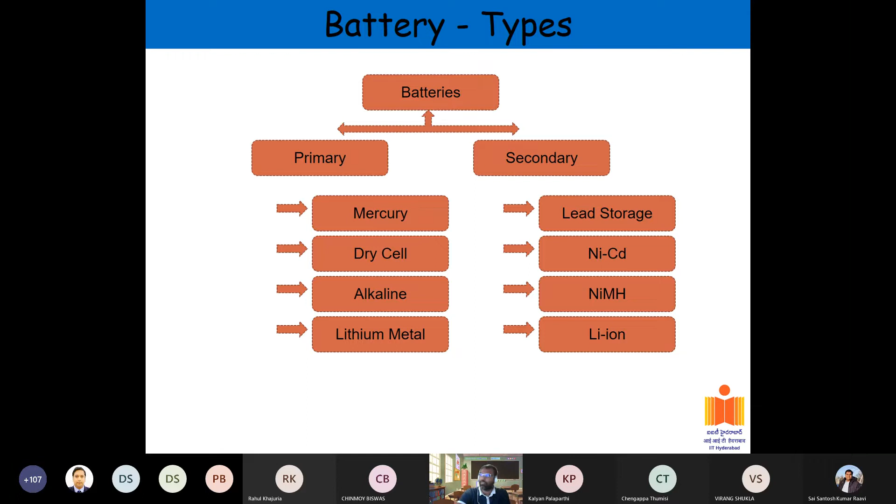There are two types, primary and secondary, as you all know. Primary is the use-and-throw type of battery, which you use in your remotes, watches, and things like that. Secondary is the rechargeable battery, so things like lead acid, lithium ion, and all those fall under that category. I won't go into detail now, we'll go more into batteries and discuss more about them on days 3, 4 and 5.

So the other interesting thing is capacitors. If you look at capacitors, there are two main types: electrolytic capacitors and supercapacitors. The electrolytic ones are low farads, generally rated in picofarad to microfarad, whereas supercapacitors are in farads. That's the main difference, and their usage is different. These dry capacitors are used to filter signals, and that's where you see a lot of signal filtering applications.

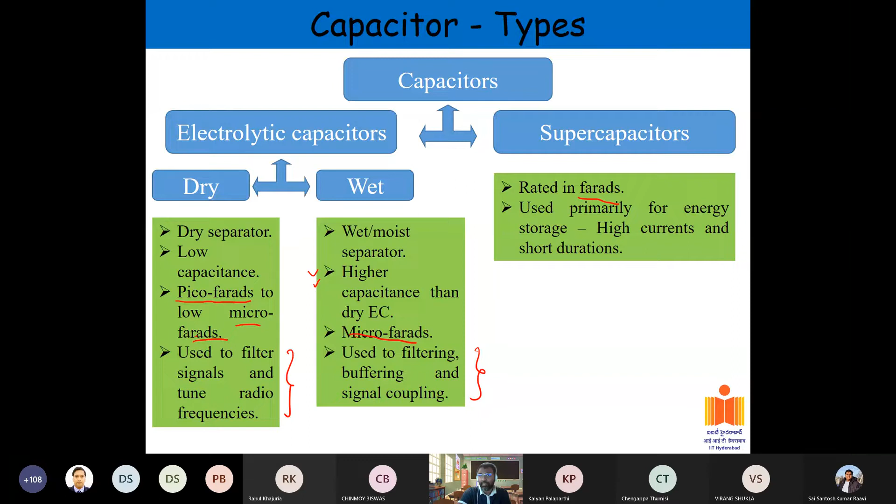Supercapacitors are more predominant in the energy storage domain. More and more people utilize supercapacitors when talking about energy storage. When you talk about supercapacitors, you can divide them into two types: double layer capacitors and pseudo-capacitors. In double layer capacitors, there is no reaction that happens, only charge migration happens.

So if you take a material, on one side you have a solid material, and you have an electrolyte on the other side, you get charge accumulation—positive charge on one side, negative charge on the other. That gives rise to the voltage, and essentially that's what you are doing. This is what you call a non-Faradaic type of double layer capacitor.

Whereas in pseudo-capacitors, there are reactions happening. So the voltage difference and current come because of those reactions. That is the main difference between the types of supercapacitors when you look at them.

And if you want to compare a supercapacitor and a battery—one of the questions could be, what is the difference between a supercapacitor and a battery, or a capacitor and a battery in general? A simple analogy would be like running a 100-meter race versus running a marathon. If you're running a 100-meter race, you want high speed, you want to be extremely fast, and finish as quickly as possible, like Usain Bolt. That is what you are achieving in a supercapacitor or a capacitor.

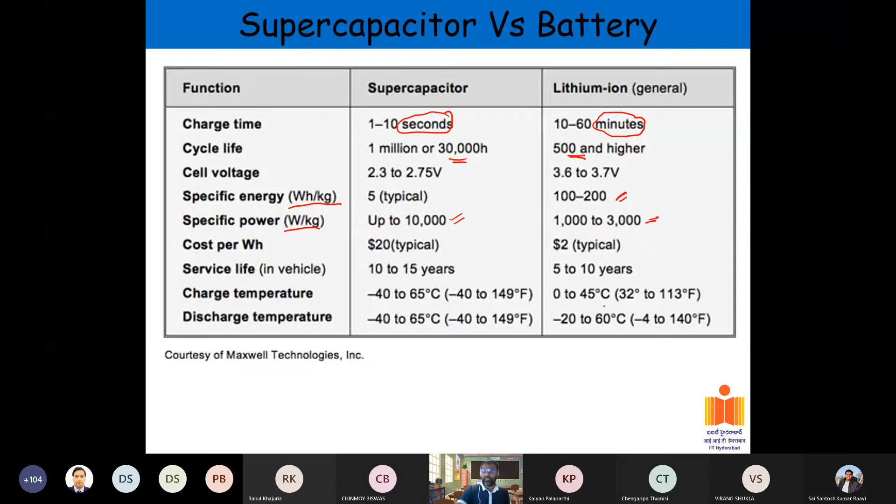So that's the difference, cycle lives are much higher in supercapacitors because they have very fast charge and discharge, whereas the cycle lives are generally lower in batteries. If you look at specific energy and specific power, the specific energy is low in supercapacitors, whereas it is much higher in batteries. Power is much higher in supercapacitors, comparatively much lower in batteries. So lithium battery has higher energy but gives it out slowly or constantly, whereas supercapacitor has lower energy but you get a burst of power. That is the primary difference when you're talking about capacitors and batteries.

And I think our talk would be incomplete without talking about hydrogen energy or hydrogen-based energy systems. I think people have looked at hydrogen generation and use of hydrogen as an energy source maybe 20 years ago, and somehow after the lithium ion metal ion batteries came into picture, this aspect has not been studied as much. But in recent years, you can see there is an increased interest in this area now, for various reasons. There are new materials out there which can actually generate good amounts of hydrogen, and this reaction can happen in a much faster manner and things like that.

So where can you use the hydrogen? When we talk about hydrogen economy, you can use it directly for transport, in fuel cells. You can also burn hydrogen directly in a tank and use it as your energy source in a car. You can generate electricity directly, and there's a chemical way, for example, you can use it for chemical reactions and be able to produce certain chemicals. So hydrogen, essentially what I mean to say, can be used in any application. That's the whole idea. That's why it is so relevant.

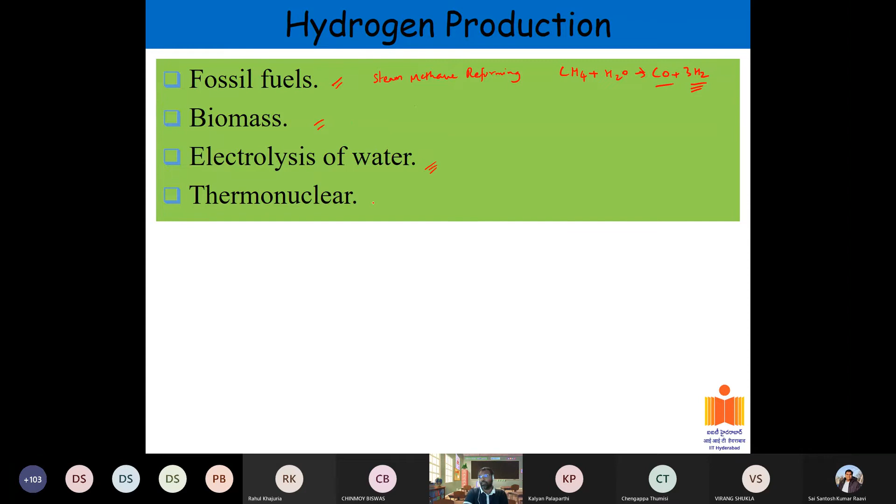So there are various ways you can produce hydrogen. You can produce it from fossil fuels. You might have heard about steam methane reforming, right? So you can take the same methane that we talked about initially, as a natural gas, and then heat it with steam. So what you end up getting is carbon monoxide and hydrogen. Most of the hydrogen that is used is generated in this way now. You can also use biomass to generate hydrogen, do electrolysis of water to break water into hydrogen and oxygen, and you can use thermonuclear ways of the same. There are various ways you can produce hydrogen.

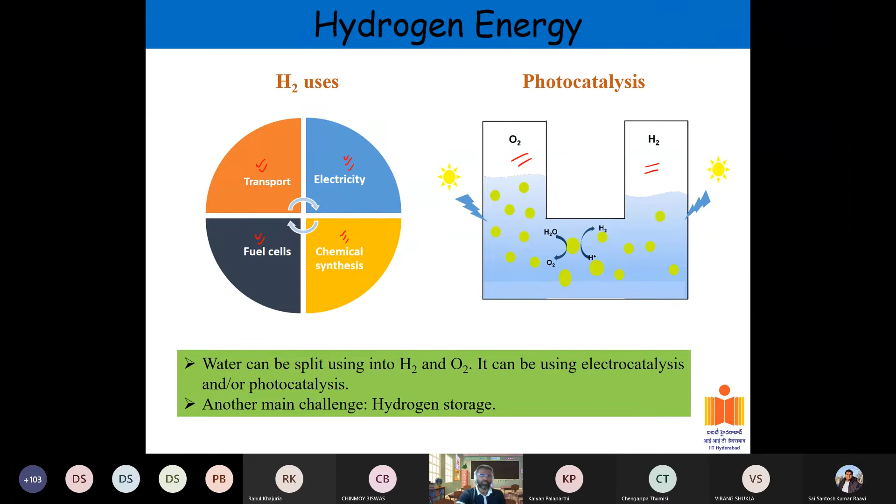And here I'm showing you how water splitting works. Essentially you are taking water and it is being converted into both oxygen on one side and hydrogen on the other. So there are various ways you can produce hydrogen. We have known enough, I think fossil fuel based way is the most widely accepted one now. So we are now trying other areas, trying to split water using sunlight, trying to split water using a good catalyst, electrocatalyst, and things of that nature. But one of the main challenges is the storage itself. Why hydrogen? Why do people even look at hydrogen? The other thing is hydrogen diffuses very fast, the fastest in air.

So when there is a leak, for example, in hydrogen storage plants, it diffuses fast in the air, so it disperses quickly. This reduces the safety concern because it gets well dispersed, and even if it catches fire, there's very little chance of a big fire. That's the whole idea, because it has better diffusion even if there is a leak.

Low density means it will rise faster than methane or anything else, so it won't stay at lower levels, it will go up. So your safety aspect is increased because of that. And it is non-toxic, which is one of the main reasons.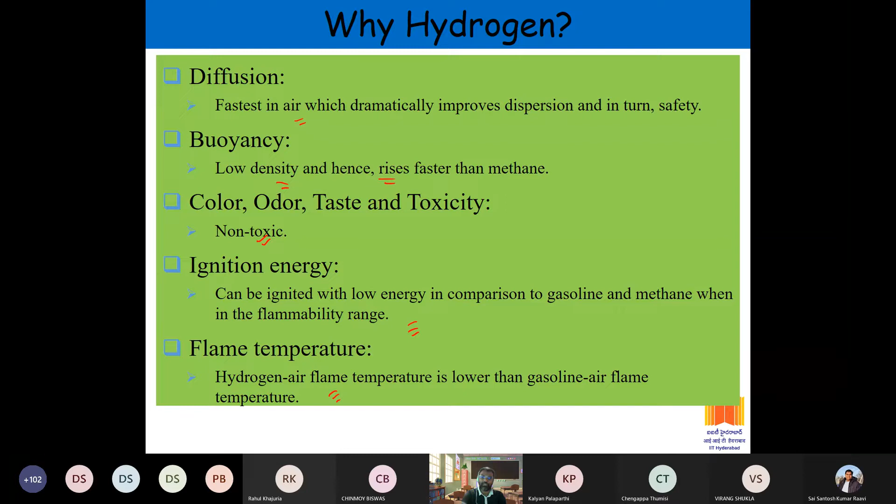If you want to use it as an energy source, the big challenge is storage of hydrogen. Existing technologies can store it as gas cylinders, like the small ones you might have used in labs, or in big cylinders using cryogenic technology. You can store it as liquid hydrogen, but this requires temperatures of minus 200 degrees centigrade, so you have to reach such low temperatures to make liquid hydrogen and then transport it at those pressures and temperatures.

The more interesting area for research is adsorption, where hydrogen is adsorbed onto materials like carbon nanotubes, metal organic frameworks, or metal hydride materials. This is where research is happening, people looking at what materials can store hydrogen. If you can use that material to absorb hydrogen, you can transport it somewhere and take it out to use. One advantage is high safety, because absorbed hydrogen won't catch flame as easily as liquid hydrogen or gas cylinders.

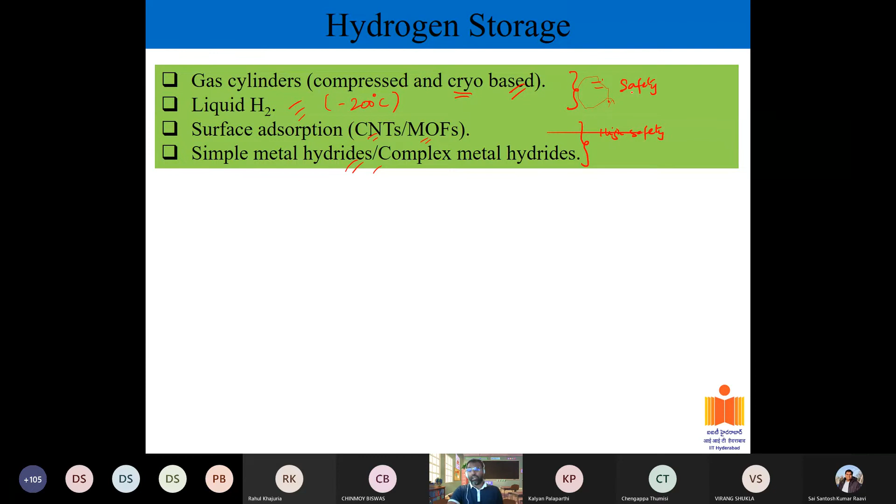So the safety aspect is a challenge with liquid hydrogen or gas cylinders, whereas with adsorption materials, the safety is inherently improved. That's why we're looking to see if there are materials that will serve that purpose and help us.

But what is the inherent problem with adsorption? In order to extract the same hydrogen, you have to go to higher temperatures. For example, liquid hydrogen is stored at minus 253, so you don't need any more energy, as the temperature rises the hydrogen comes out. Cryo-adsorption is also around minus 200. But if you look at metal hydrides, release happens in the room temperature range, which is why these are very interesting.

The most interesting hydrogen storage materials are metal hydrides, then compressed hydrogen, other metal hydrides, and water, with temperatures going up and up. Water is a very stable molecule, so to break it, from a temperature perspective, you need 1000 degrees or more.

The inherent problem is that sometimes we talk about surface adsorption, but releasing it might require a lot of energy, so that's something you need to keep in mind. As it stands today, I think metal hydrides, interstitial metal hydrides, are the way to go to store hydrogen. If not, the best ways today are liquid hydrogen, if you can transport it that way, or compressed format in cylinders. But if you want a solid material with improved safety, it is interstitial metal hydrides.

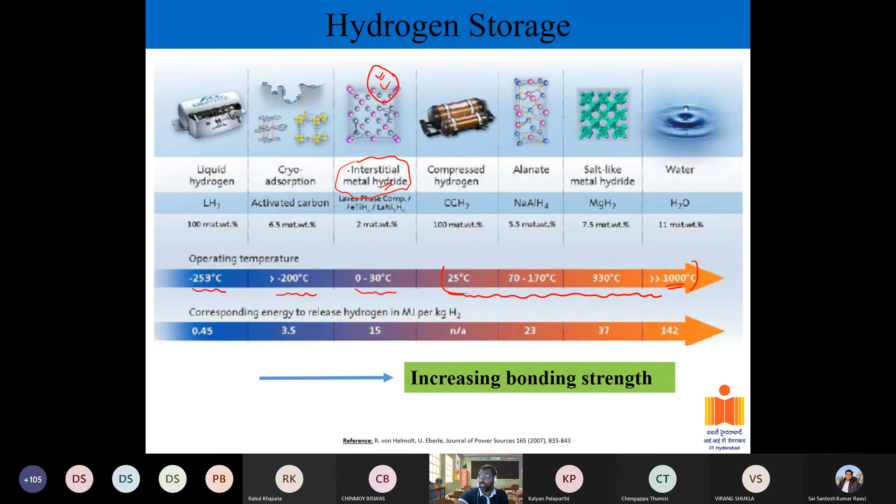Okay, and I think the last one in energy storage is the chiller technology. This is something you might not have paid attention to, but a lot of big buildings have this technology.

So what you have is cold water running from top to bottom or bottom to top. And then, each floor there is something called an air handling unit. So this building cooling or chiller technology has three main units: the chiller unit, located at the bottom in this figure, the cooling tower located at the top, and then the air handling unit.

These air handling units are in each floor, for example. So what is happening? You are running the cold water through each floor. In simple terms, you have air in that floor. Let's say it picks up some air from your room, which is at a higher temperature, and it goes through this air handling unit, exchanges that heat with the water, and the air comes back colder and blows at you. So essentially you are getting cold air in that manner. Hot air goes in, exchanges heat with water, and comes back to you as cold air, and that's how you feel the cold air.

And then the water, what is happening? It is absorbing the heat from the air, and water goes from room temperature or very low temperatures to high temperatures. So there is water cooling happening somewhere else in the system, usually in the cooling tower, where the water cooling happens. So that is another energy storage technology that we employ quite a bit now. Every building uses this chiller-based technology. If you look at any big buildings, they use chiller-based technology, and this is very predominant in a lot of locations. So this is another energy storage system.

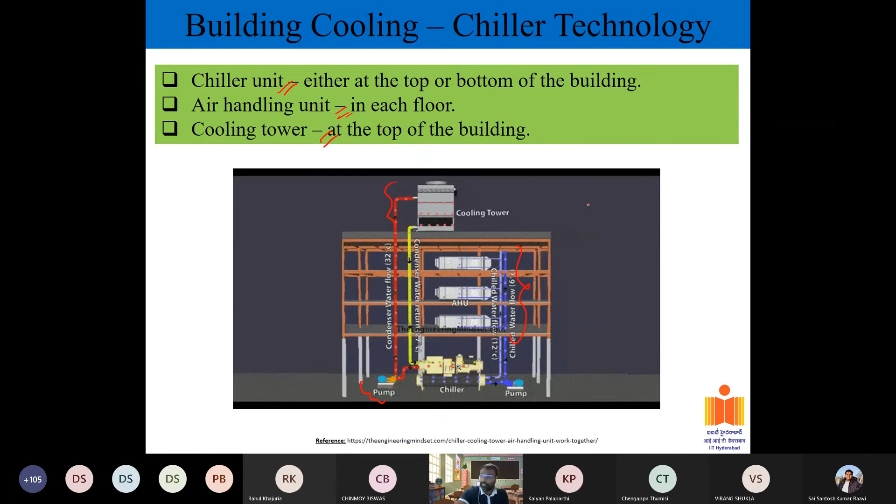So whenever we are talking about energy storage systems, I think I'll try to wind it up in the next few minutes, then we have time for questions.

So whenever you're talking about energy storage systems, you talk about some terms like specific energy and specific power. I referred to this earlier too. So what does specific energy mean? It's defined as either per unit weight or per unit volume - you can say gravimetric energy density or volumetric energy density. But what does it mean? It only tells you how much energy is contained in that system, the total amount of energy, like a bottle of water in this case. It's the total energy contained in that system. It doesn't tell you how fast or how slow you can extract the energy.

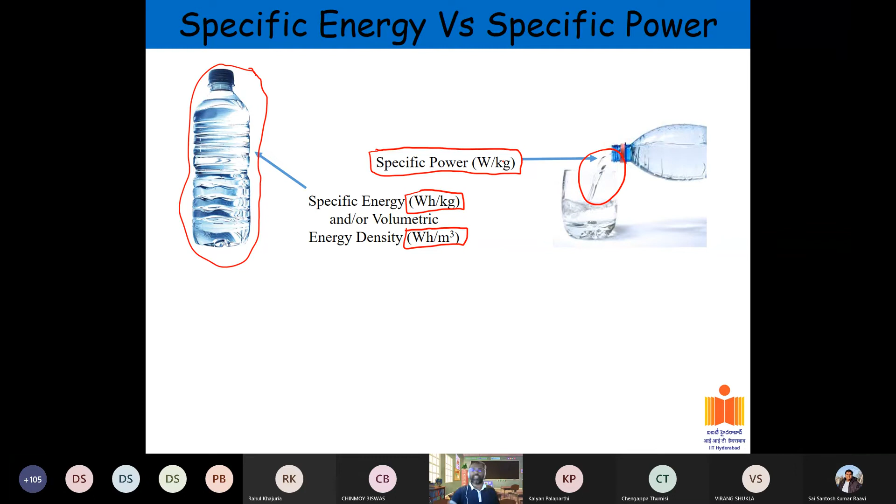That is specific power - it tells you the rate at which you can extract energy, like if you are pouring water, for example. So that is watts per kg. Specific energy and power are both very important when referring to any energy storage system. Energy is the total energy content. Power is how fast or how slow you can extract it.

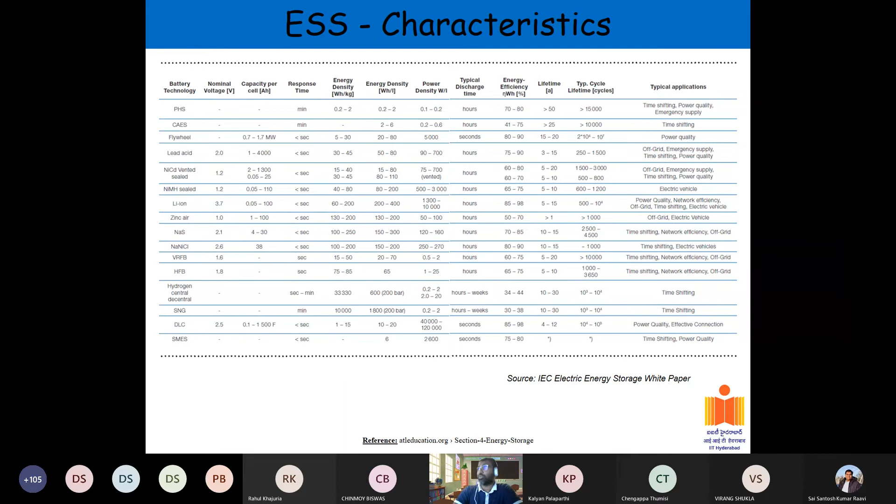So if you go back, these are the things I listed here, for example, several battery systems. I think if you go back and look at this slide, you can get more information - I'm not going to go through those details, that's just a collection of data there. Here we are looking at specific energy in megajoules per kg, and gravimetric energy density per kg and volumetric energy density per liter. So why is this important?

For example, if you take a car, even if you have very high specific energy density per weight, which is the gravimetric, if the volumetric energy density is very low, what is the problem? You need a large volume to be accommodated, which is very hard to fit in a car. So if you are looking at a car, you want very high gravimetric energy density as well as volumetric energy density.

Whereas if you're looking at a ship, for example, you are not worried so much about the volumetric energy density - it can be low, but a ship can accommodate that kind of volume. So you are more interested in the weight part - you don't want to add a lot of weight, but volume is fine for a ship. So essentially, the reason I'm putting this out here is these are terms you should get familiar with to understand what they mean.

So if you look at this chart, if you look at liquid hydrogen, hydrogen gas and everything, the gravimetric energy density is very high. But because hydrogen is a gas, the volumetric energy density is very low. So if you want to use it in a system where volume is very important, it's not very good.

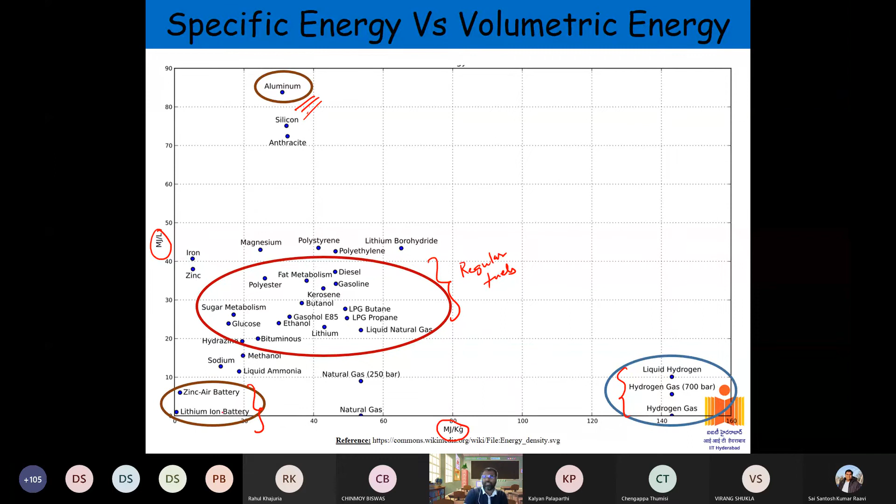So this is why we are trying to jump from here to here. That is the whole idea in learning these things and understanding these things.

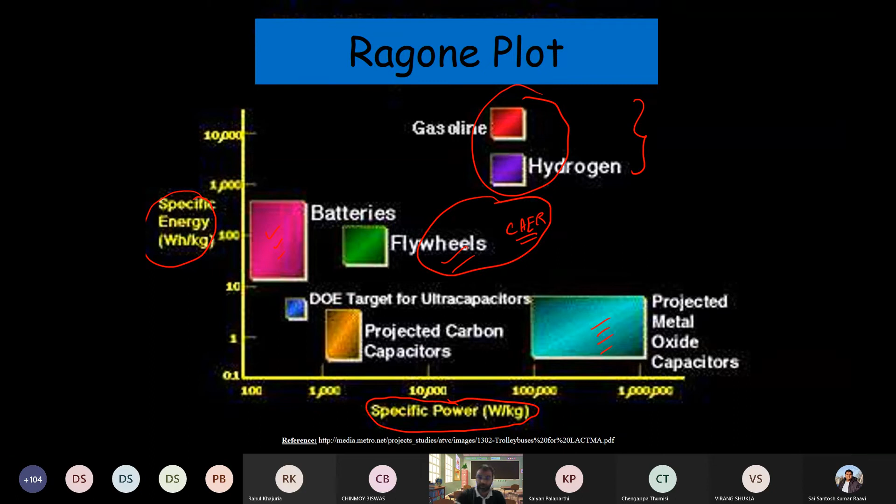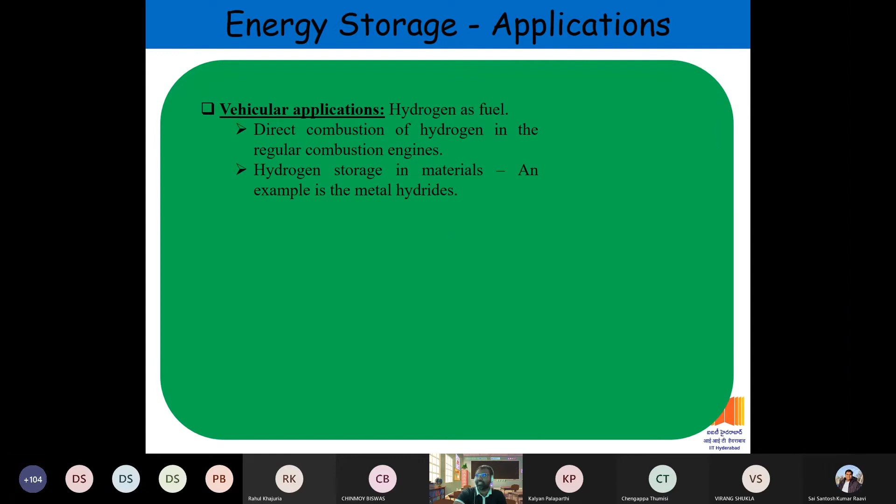Okay, I'll quickly finish this. When you look at energy storage, applications are there: portable applications, vehicular applications, you can use it in various things. One thing to keep in mind when you talk about energy storage is that the scales are important.

For example, if you are talking about mobile scale, you are talking about 100 watts of energy. Generally, if you're talking about a single home or a few homes together, 50 kilowatts. If you're talking about a small area together, 1 megawatt kind of thing, and then grid scale, which is where you are producing and distributing energy. So the reason I talk about scales is that all the scales can have different good energy storage technologies.

So for example, here lithium ion might be good, maybe here it might have more challenges. Whereas lead acid might be better here, or compressed air can be better here, whereas here it will not be very good. So I think the point being, you have to understand the scale of energy storage to have the right kind of chemistry, right kind of technology come into picture.

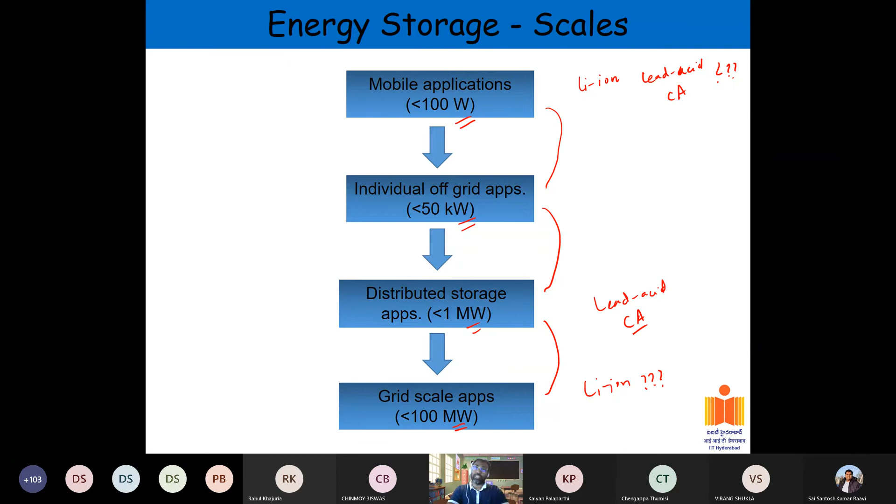So you need to be very careful when you're referring to these energy storage scales to assign the right energy storage technology to that scale of energy storage. Okay, so that's different scales.

So, for example, if you look at India, I am an electrochemist, I work on batteries along with several other things. But one of the things that is not taken up at a high scale is exploration of lithium. So as it stands today, we don't have any lithium deposits. So we want to do lithium ion battery, but we don't have any lithium deposits in the country.

So again, it goes back to the same thing: we have to import it from somewhere. Most of the lithium deposits in the world now exist in only two places: Chile, South America, or China. Same thing with some of the other cathode side materials, some of the other battery materials also, it's similar. We don't have cobalt, we don't extract cobalt at all, we do very minimal. So I think in order to be able to make our dream a reality, some of these have to be taken up.